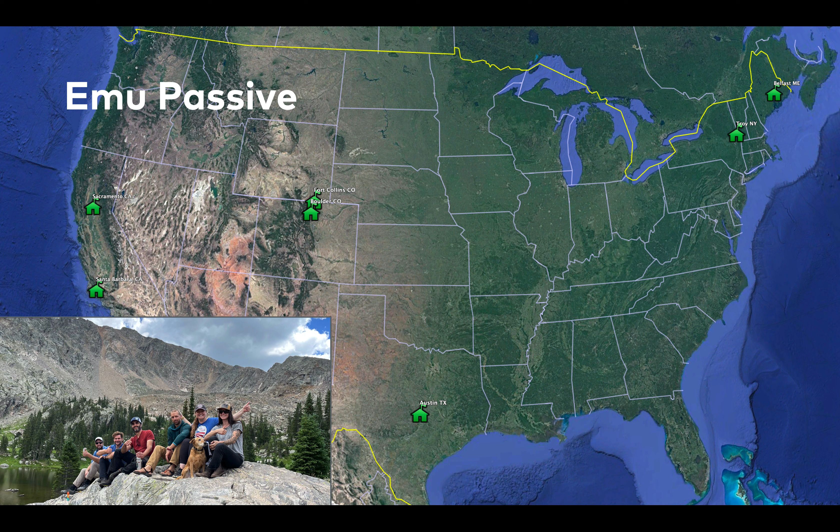Emu started as an architecture company about 15 years ago. We have working experience in Italy, Germany, Australia, and the US, which allows us access to research and information from other countries and climate zones, which we bake into the projects we do and the training we provide to builders.

Emu is the actual Australian bird. It's not an acronym, it's just a bird.

We started in Passive House in about 2010, and for at least 5 years now, we have 100% Passive House projects. We do not do code compliance, we do not do net zero, we do Passive House. We do Passive House very well, and we do training mostly, and we support builders in their first few projects, and that is the consulting that we do.

We are now the biggest training providers for Passive House builders in the country. This map shows the 1 week in-person hands-on workshops that we had just in 2022. We have a trailer that we take the workshop on the road, and we meet builders from across the country and teach them about Passive House.

We operate in a very niche market where hitting 0.3 ACH50 at the blower door test is normal instead of 3 ACH50 as code minimum. And this is a really big drive for us.

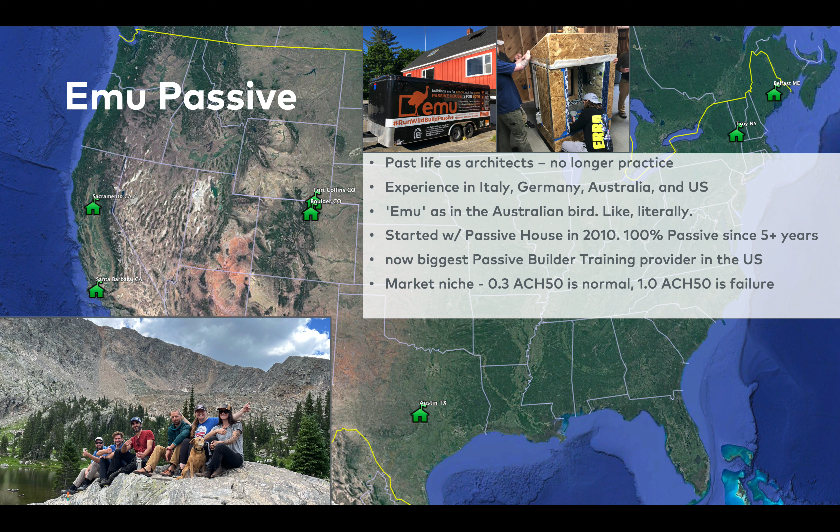Some of the presentation you're going to see today is informed by how normal it can be to hit that high level of performance. In our niche, hitting 1 ACH50 is kind of a failure, while it's still way below code minimum performance. We have Passive House consultants on staff.

I am the only certified PHPP expert in Colorado and many states around. And I'm also the only licensed certifier in Colorado for the Passive House Institute.

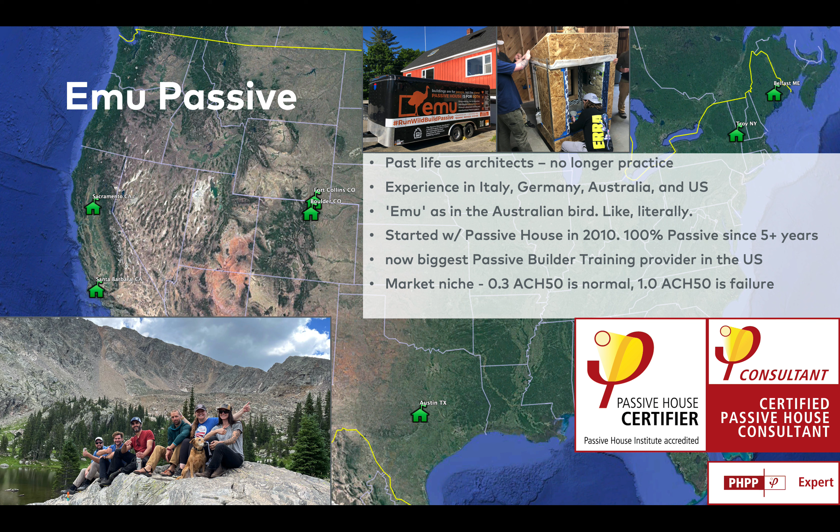Today, as I mentioned, we're going to go over the certification process, starting off with an overview of the Passive House standards that are operating in the market, looking at design stage, construction, verification, and certification.

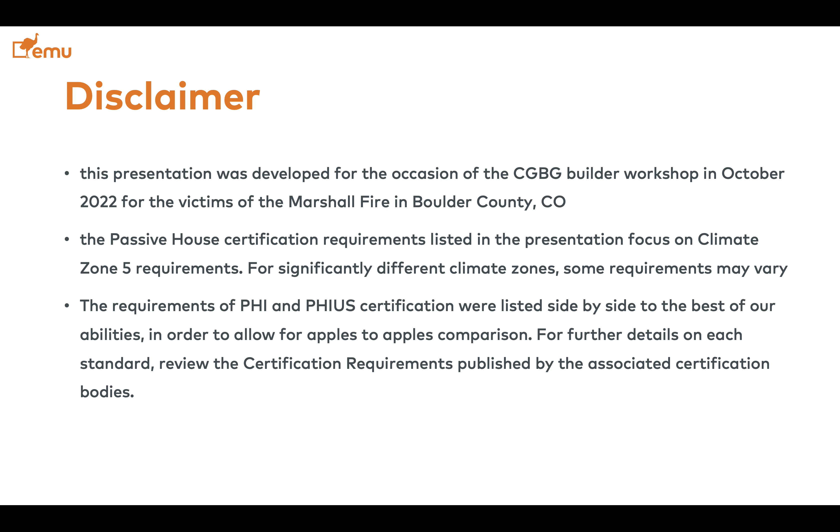We also try to compare the certification requirements of PHI and PHIUS to the best of our abilities. We are actually working on a white paper comparing the two, and we put together this presentation today trying to portray both standards as accurately as we could.

So talking about Passive House standards first, and really the Passive House concept first. We have a design of a building, floor plan, building section. This is actually a design for my personal house up in the mountains. And we are implementing 5 pillars of Passive House. First of all, super insulation.

The assemblies are much more insulated than code minimum. This sometimes comes as a surprise to an architect, who may think they can do Passive House in Climate Zone 5 with the same R20 6-inch walls as they do code minimum. That's not going to happen.

Then we want to avoid thermal bridging. We're going to see what that means in terms of requirements, but we want to avoid mold and condensation, something that code does not cover, but Passive House does. We want to have high quality windows and doors in order to meet thermal comfort. Again, this is something that code is decades away from implementing, and Passive House does very well, and PHI has the comfort requirement to address that.

We want to be very airtight, and we want to have a fresh air ventilation system through the ERV or HRV. Now, for single-family homes, the impact of thermal mass is highly negligible. If you Google what's a passive house, you'll find thermal mass mentioned there. The reality is that for residential projects, the impact of thermal mass is negligible.

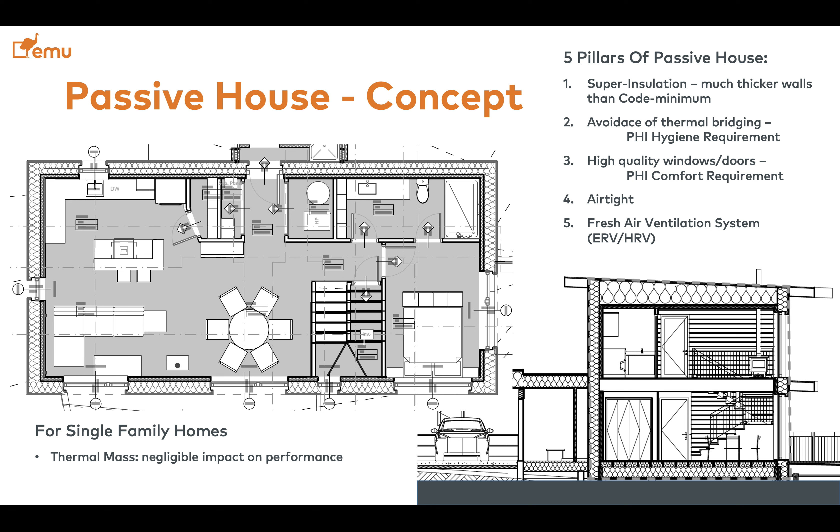We've done dozens of passive houses without thermal mass, and the comparison is that you cannot get to a passive house without insulation, but you can get to a passive house without thermal mass. So that is a big misconception in the market right there.

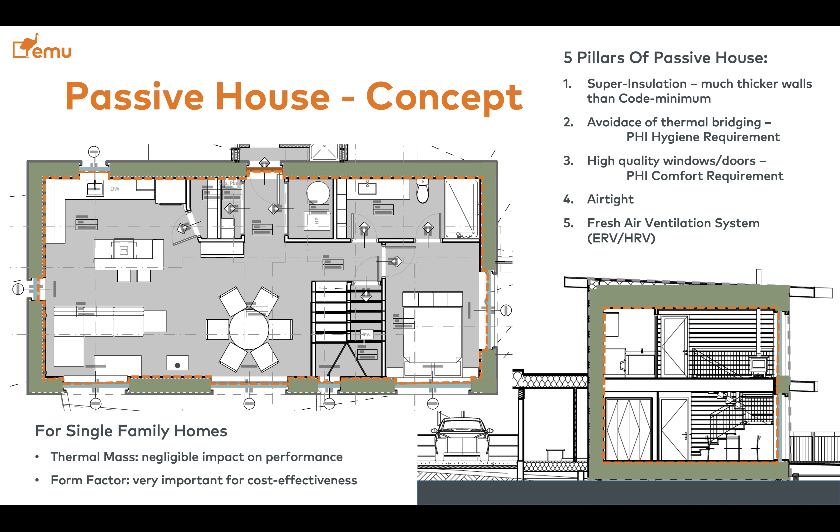The form factor we're going to see today is one of the very most important things to make a passive house project cost effective, and that is where architects are extremely crucial to this part of the process. So the green and orange here highlight the amount of insulation that we need in the walls of the building thermal envelope and the air barrier that runs on the interior of that.

We have two institutes that work independently and separately from one another: the International Passive House Institute on the left, PHI, and the Passive House Institute US, PHIUS. They used to work together until about 10 years ago. They no longer do that. It was a bad divorce, and we need to move on from that.

Now, for new builds, they offer different certification standards. PHI on the left offers what they call PHI Passive House. The Classic, Plus, and Premium classes are something we'll see later today. PHI also offers a lower entry-level certification standard that actually performs very similar to the PHIUS 2021 standard, called the Low-Energy building.

PHIUS offers a performance-based standard, the PHIUS 2021 Passive Building Standard, which I've shortened to PBS since Passive Building Standard is very long. The alternative is a prescriptive approach that PHIUS offers for single-family homes. PHI, the international standard, does not offer prescriptive approaches because in their experience that is very risky in terms of actually delivering the performance one expects from a passive house.

We do not address remodels in this presentation. Both institutes have standards specific to remodels of existing buildings, but because this presentation is put together mostly for the Marshall Fire victims, we're not going to address remodels right now.

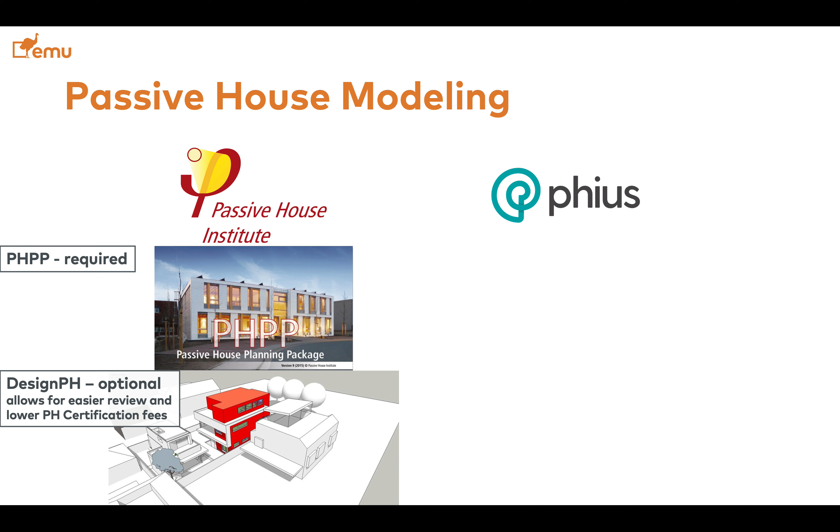PHI uses PHPP, the Passive House Planning Package, and they also have a 3D interface for SketchUp called DesignPH, which is optional but makes it a lot easier for architects or consultants to do the modeling in the first place. It also makes it a lot easier for third-party certifiers like ourselves to certify and verify what you did. We literally issue a different fee if you do or don't have the 3D modeling, because without a 3D model, it's a lot harder for us to verify what you did.

PHIUS uses WUFI Passive. WUFI stands for the German Wärme und Feuchte instationär, a software that initially started just for moisture management analysis of individual assemblies. After the divorce, the Fraunhofer Institute in Germany developed a software to do passive house modeling, which is WUFI Passive.

Both PHI's PHPP and WUFI Passive are based on the same ISO standard 13790, so it's the same core of modeling. Calculating the same building with one or the other, with the same parameters, I would expect the results to be very close to one another.

What differs is the certification goals that PHI and PHIUS set for their projects. But if you model the same identical building with the two different software programs, the results are supposed to come in very closely to one another.

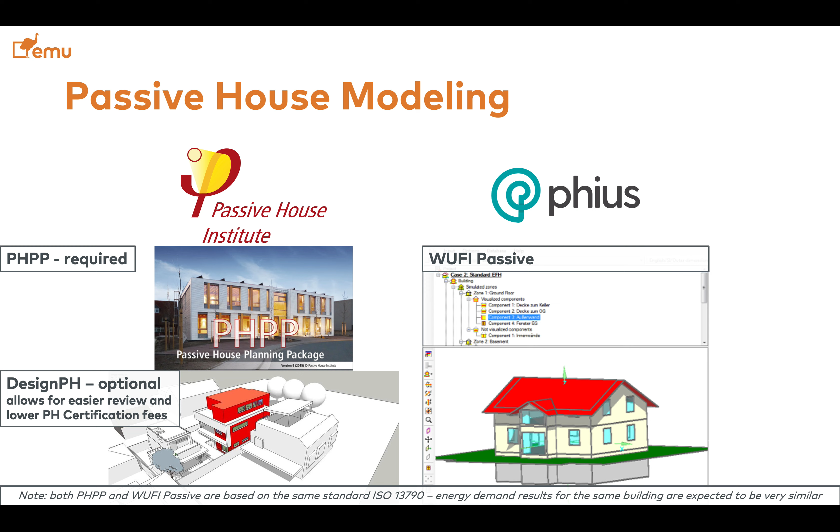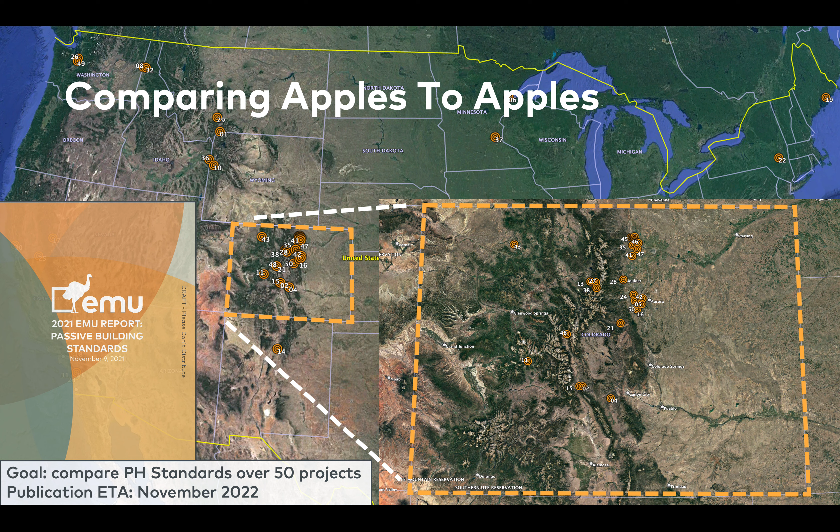This study is supposed to come out in November 2022. It was supposed to come out in November 2021, but life happens and things go along. Just in Colorado, we have dozens of projects, so we use this in this presentation a bit to compare the two standards.

In terms of overall efficiency, that is the reduction of heating and cooling compared to the 2018 code, PHIUS 2018 and PHIUS 2021 achieve about 60 to 63% reduction for the performance-based approach, reduction of site energy for heating and cooling compared to the 2018 code minimum compliance.

The PHIUS Prescriptive achieves about 50 to 55% reduction compared to the 2018 code baseline, whereas the low-energy building, as I mentioned earlier, performs—it's not called Passive House, but it performs better than PHIUS Passive House, just if you look at the actual numbers. This is based on about 50 projects that we have, and this study is going to be published soon.

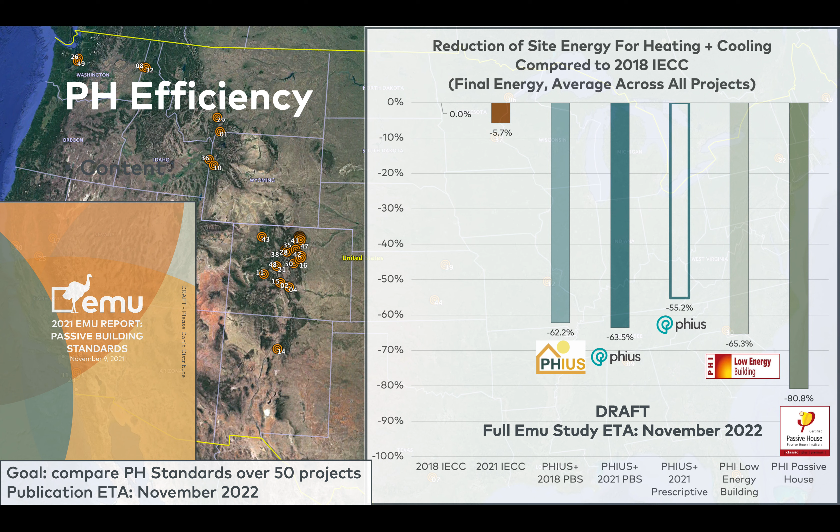PHI's Passive House, on the other hand, is the most performing in terms of reducing heating and cooling, with a reduction compared to the 2018 code of over 80% on average. So the certification requirements we looked at through the lens of the Marshall Fire, which is located in Climate Zone 5.

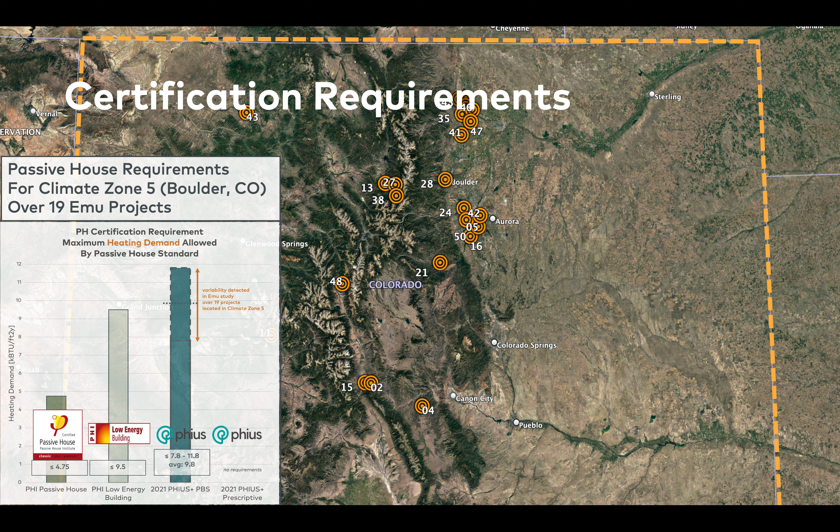We have 19 projects used for this analysis. In terms of heating demand, PHI Passive House is set at 4.75 kBtu per square foot a year maximum heating demand allowed. Low Energy Building has twice that, so 9.5 is the limit. PHIUS, as I said, has quite a bit of variability depending on size and complexity of the project. Over the 19 projects we saw, it ranged between 7.8 and 11.8, averaging 9.8 kBtu per square foot a year, so slightly less performing than the Low Energy Building.

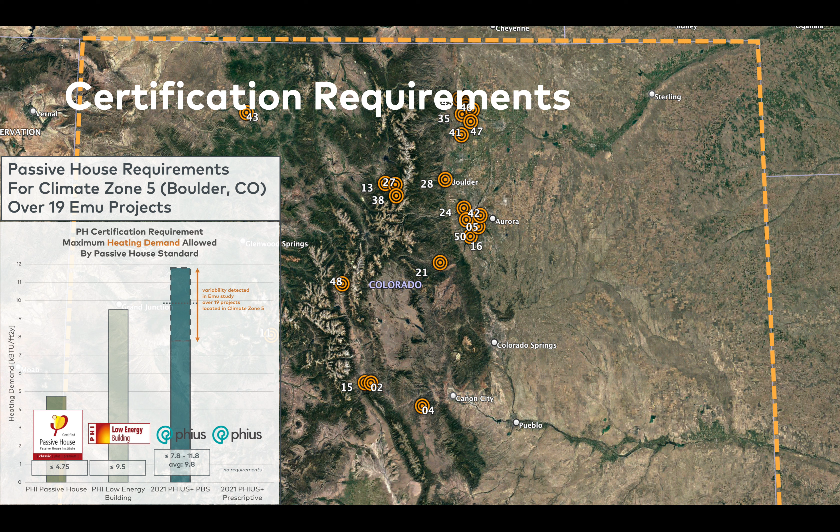In terms of cooling, PHI Passive House has 4.75 sensible cooling plus some allowance for dehumidification, which in Colorado, a dry climate, is 0. Low Energy Building has 9.5, and PHIUS, over the 19 projects we looked at, had a similar range—this may need updating because the variability is actually between 4.5 and 9.5. The numbers listed under the PHIUS logo, I apologize, are not up to date, but the graph is. The average for cooling is slightly less than 7 kBtu per square foot a year.

Something interesting is that the variability of PHIUS also changes depending on project size. PHIUS uses a surface-area-related parameter, the Q50, instead of the ACH50. For these projects, we converted those numbers to ACH50 so we can speak the same language.

PHI Passive House has a maximum allowed air leakage at the blower door test of 0.6. As I said earlier, once you get into this, doing 0.3 becomes normal, so 0.6 is not intimidating at all. Low Energy Building is less than 1 ACH50.

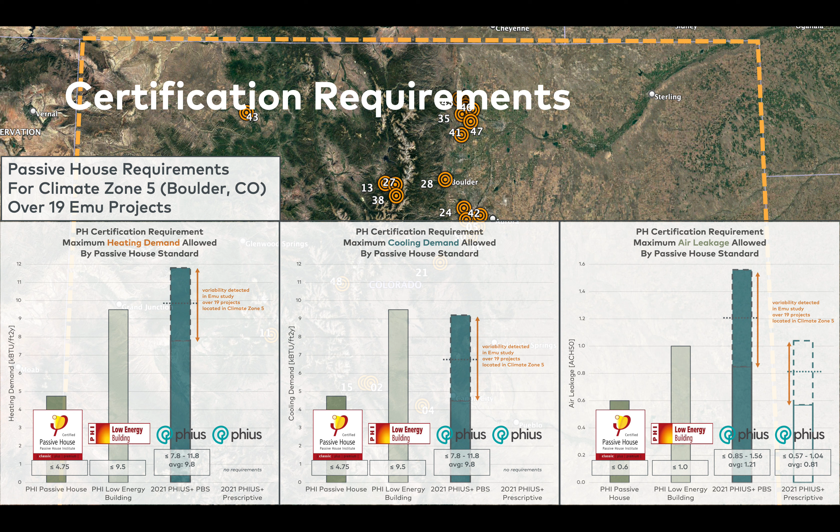For the study, PHIUS performance-based, shown in the blue column on the right-hand side, has a variability between 0.85 and 1.56, with an average of 1.2—so higher air leakage for PHIUS performance-based compared to the Low Energy Building. Interestingly, the prescriptive standard for PHIUS requires the building to be tighter, with an average listed here between 0.57 and 1 ACH50, at an average of 0.81. So in terms of air leakage, it's tighter than the regular PHIUS.

Core requisites. If you look at the details for PHIUS certification, there are some core requisites.

You need to certify the building not just with PHIUS, but you're also required to follow the EPA Energy Star Certified Homes program, the EPA Indoor airPLUS program, as well as the DOE Zero Energy Ready Home program. Whereas PHI doesn't do that—it's just PHI, either PHI Passive House or PHI Low-Energy Building.

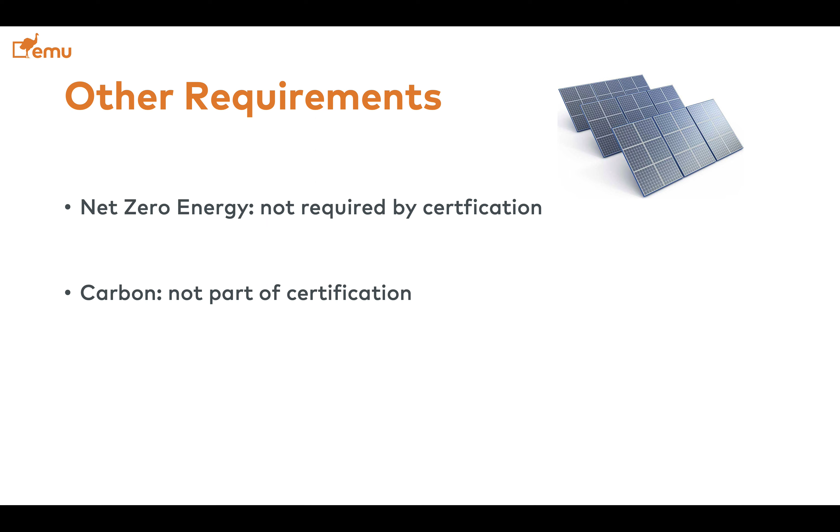Other requirements you may be wondering about: net zero energy is not required for certification—you can get there, but it's not required. Carbon is not part of Passive House certification; you may use low embodied carbon materials, or you may not—that's up to you. It's great if you do, but it's not part of Passive House certification. Going all-electric, heat pumps, whatever—that's also not part of certification, nor is any prohibition about specific materials.

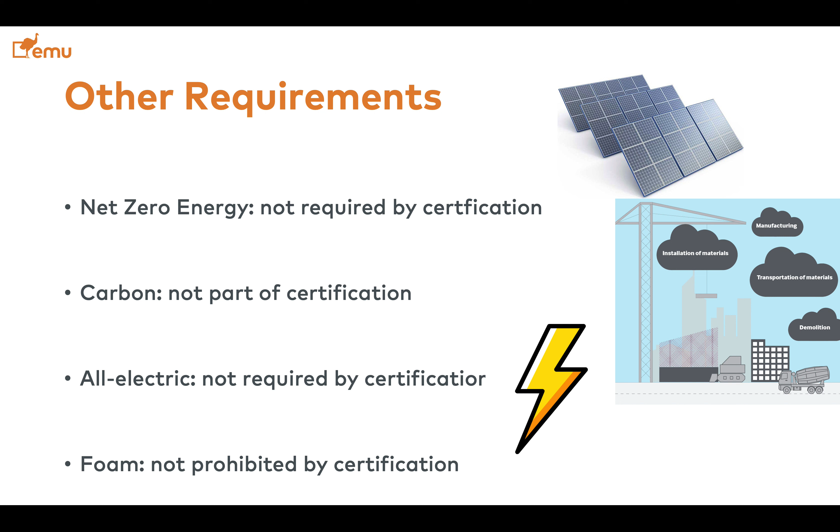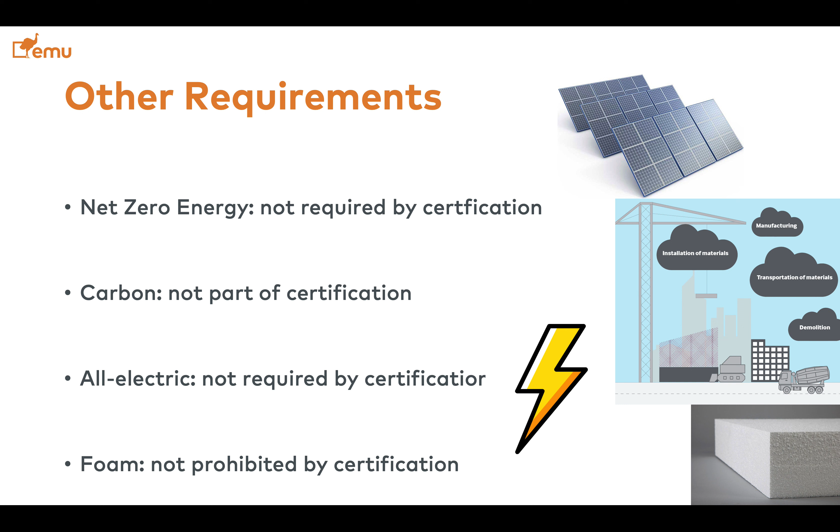There is a myth that you cannot use foam in Passive House. You can, and it's up to you to do that. With regards to spray foam, for example, you want realistic performance data, which are much lower compared to the label value of spray foam products, but there is no prohibition in terms of foam in Passive House projects.

A quick overview of the parties involved at different stages of a Passive House project. For Passive House, you have a Passive House consultant, who may or may not be certified, but is the person in charge of all the passive-related things on the team, including the energy modeling. In fact, the Passive House consultant also collects some of the construction documentation.

We're going to see what it is. The testing, especially for the blower door test, can be done by any blower door test technician out there, as long as they have the equipment and follow the ISO standard we're going to cover later. But PHI does not require the blower door test technician to undergo any specific type of training, other than being trained in doing blower door tests. There's no PHI certified blower door test guy sticker.

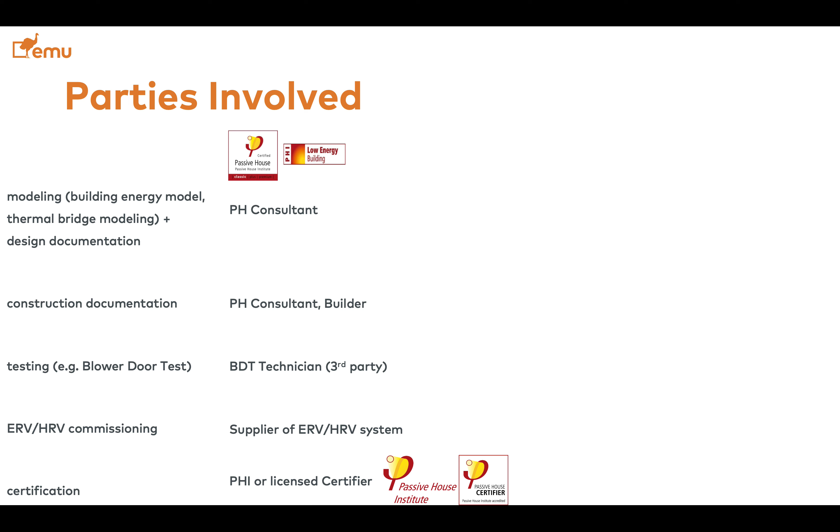The ERV, HRV fresh air system we're going to see later in this presentation, they need to be commissioned, and they are typically commissioned by the supplier or the installer of the system per the specs we're going to see later. Certification itself for PHI can be done either by PHI itself or by a licensed certifier on behalf of PHI, like myself.

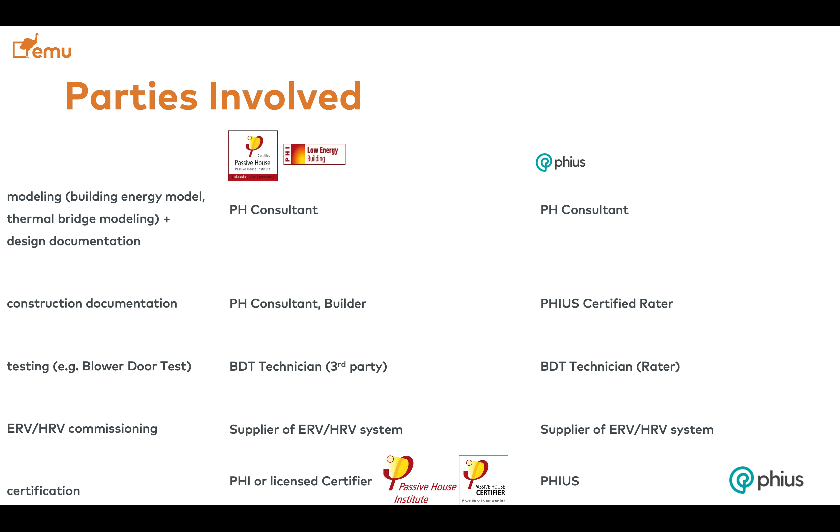For PHIUS, you have a Passive House consultant. You have a separate PHIUS rater that you have to hire to collect information during construction. The blower door test technician, I'm unclear if there can be anyone or it has to be certified by PHIUS. Similar consideration for the commissioning as for PHI, and certification is done by PHIUS directly.

Now let's look at the design stage. We talked about a little bit of the infrastructure for certification. Let's look at things that need to be addressed and taken care of during design.

So this is a big responsibility for architects to tune down the non-artistic creativity here and actually be responsible for the designs that they're doing. The more complex the shape of a building thermal envelope, the harder it is to make Passive House. A complex architectural design may make it impossible for a building to meet Passive House. Passive House is not something that you throw money at and get it. It needs to be efficient. You can throw a lot of money at the problem and try, but if your design sucks because it's very complex, you're out of luck.

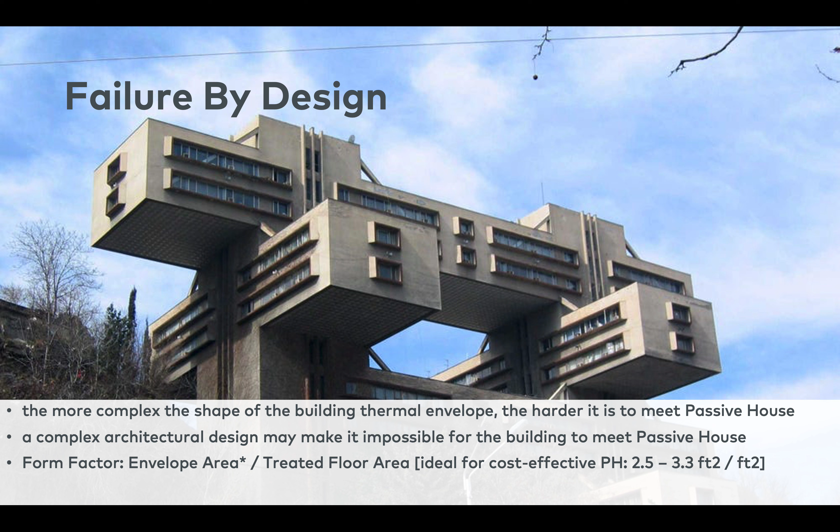You're not going to get there. This is not a checklist. The form factor is what defines the complexity of a project, and that is the area of all the exterior envelope assemblies: the area of the exterior walls, the area of the ceiling if your thermal boundary is at the ceiling, or the area of your roof if your thermal boundary is at the roof, the area of your floor or slab depending on where your thermal boundary is at the bottom. All of that area of the envelope divided by the treated net floor area, net of the interior walls and exterior walls as well. That number, the form factor for a single family home, we want to see in the range of 2.5 to 3.3. If you're in that range, it's going to be fairly easy and cost effective to get to Passive House. If you are much higher than that, it's going to be much more expensive and possibly impossible to get to Passive House.

So let's look at the Passive House designer and consultant. The consultant is the person in charge of Passive House on the design team. Specifically, they're in charge of developing and updating the energy model, whether it is PHPP or WUFI Passive. They may also be in charge of covering other scope, such as thermal bridge modeling. Sometimes we do the thermal bridge modeling for other consultants on other projects where we are not the consultant, we just do the specific thermal bridge modeling task.

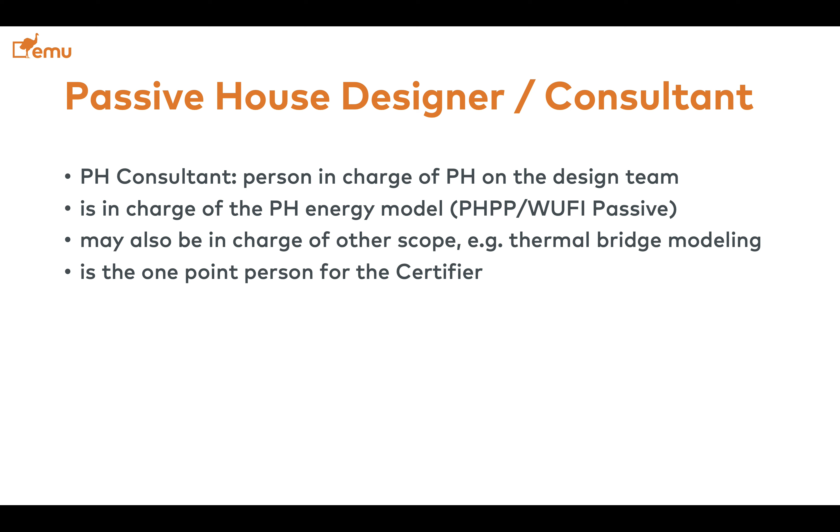So the consultant is mostly and primarily in charge of the Passive House energy model, as well as interfacing with the certifier. In fact, the Passive House consultant is the one point person between the certifier and the team. We had teams where we started receiving information from the builder, from the homeowner, and that does not work. We need to have one single point person throughout the process in charge of Passive House on the team, and that is the Passive House consultant or designer.

We talk about consultant or designer because in the international accreditation for the consultant, you have in Europe, or internationally—Australia, China, everywhere else than the US—PHI offers professional accreditation for people that do the modeling, and they can be certified as designers or consultants.

The only difference between designer and consultant is that in Europe you cannot call yourself a designer unless you are a registered architect. So I, Enrico, am also a certified Passive House designer because I'm a registered architect back home in Italy.

Whereas if anyone that is not an architect, back home or internationally, passes the exam—it's the same course, same exam, identical path—you become a designer or a consultant depending on your previous professional accreditation, that is, whether or not you are a registered architect. For PHIUS, there's only the certified consultant, which applies to both.

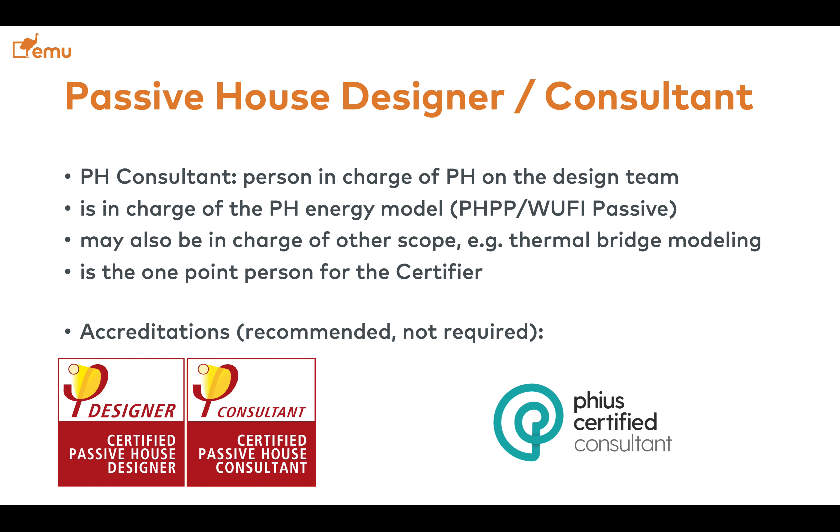There's some confusion in the market about consultant for PHIUS, that is a registered trademark, but the Passive House consultant term has been used internationally for decades, so that trademark kind of does not matter.

Design, we talked about the form factor, and for cost effectiveness, the first priority is keep it simple. Keep the building envelope simple. If you do that, it's going to be a lot easier to air seal, to insulate, to get the right sequencing down. It's going to be a lot cheaper.

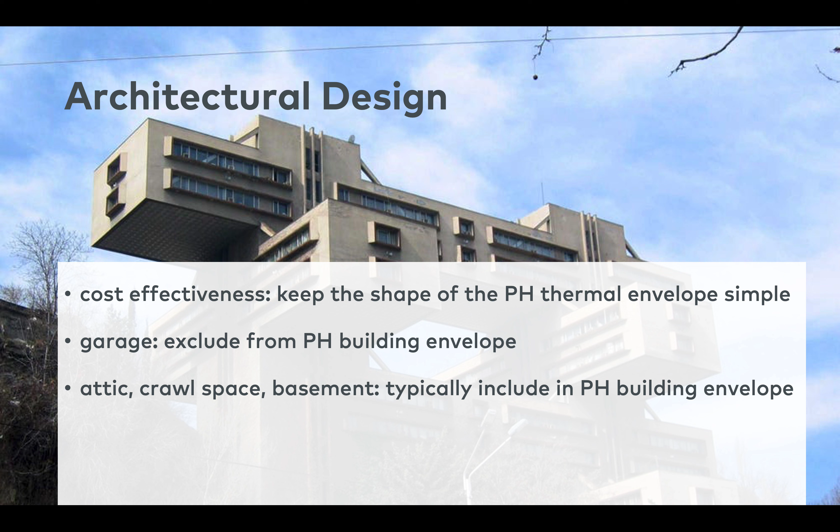For example, garage excludes from the Passive House building envelope—that's a friend's advice I give you. We have tried in the past to include the garage in the Passive House envelope. Do not do that. Attic, crawl spaces, basement—typically include them in the Passive House building envelope, especially because they make your form factor look better.

So the more glass you have, the more expensive it's going to be. It's as simple as that. Plus, there are ways to increase the amount of energy coming through the glass by just adjusting the coating on the glass. So you don't need the entire south wall to be glass. You don't need to live in a fishbowl. That's the feedback the energy model provides you with.

Do expect much thicker walls than code minimum if you expect to do Passive House in Climate Zone 5. With a 6-inch R20 wall, you are off with a wrong start. So expect at least twice that thickness and R-value.

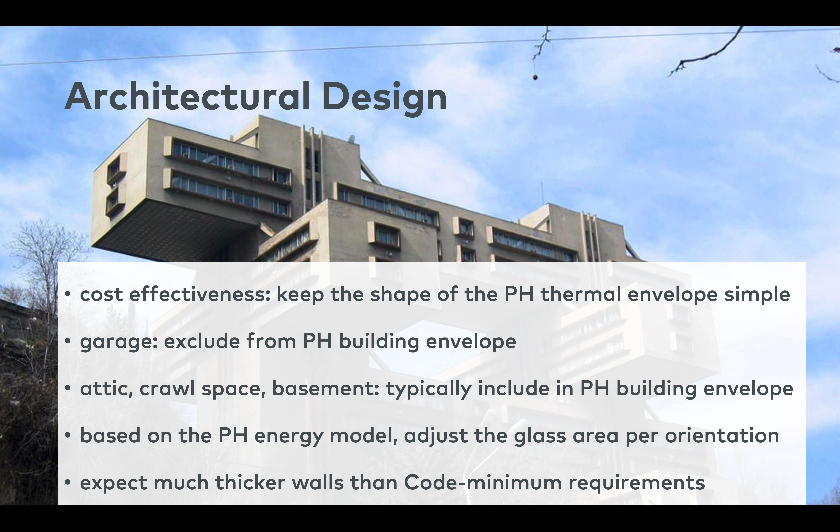Typical causes of thermal bridging—this is something we just put a list together. We need to talk more about that, but that's why we do training. Avoid metal beams and posts in insulation at exterior walls, exterior floor, exterior ceiling, or penetrating through the envelope from the inside to the outside.

Concrete, especially slab or walls, penetrating the envelope—that is a thermal bridge. Metal flashing through the insulation: metal flashing, in my experience, is the most unaddressed and most detrimental source of thermal bridging in the country today.

Nobody talks about that, but if you have a piece of flashing going through your insulation, that's a thermal bridge. That cuts your insulation value down. It cuts down the performance of your building, and it may cause more than condensation. So if you do want to have flashing going through your exterior insulation, there are other products such as self-adhered flashing or vinyl flashing. Do not use metal, period.

Metal sill pan penetrating under windows, that is very popular for some builders—that's a huge no, period. Uninsulated window and door install gaps: installation gaps between the window and the rough opening need to be insulated on all four sides, period.

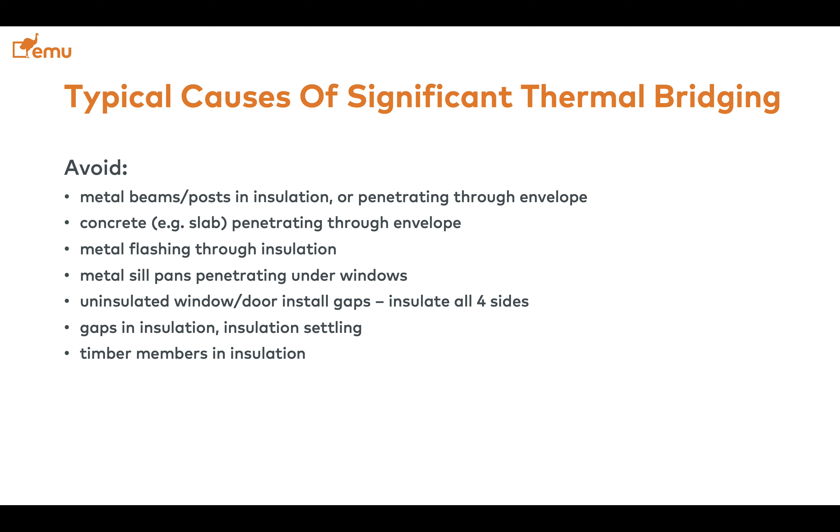Let's move on. Gaps in insulation settling all lead to underperformance of the building. And timber members in insulation, such as your studs, do cause thermal bridging, but compared to metal flashing or steel posts, they are mice compared to elephants. So there's a lot of effort out there to try to mitigate mice, while elephants are left to roam free and damage your building. Be aware of what you're doing. You really want to know what is important to address and what is not, because that drives the cost up and down. If you want to be cost effective, you really want to know what's a mouse and what's an elephant.

Some of this cannot be avoided, and the first thing we want to avoid is condensation. So the consultant on the project needs to do the modeling, the thermal bridge modeling.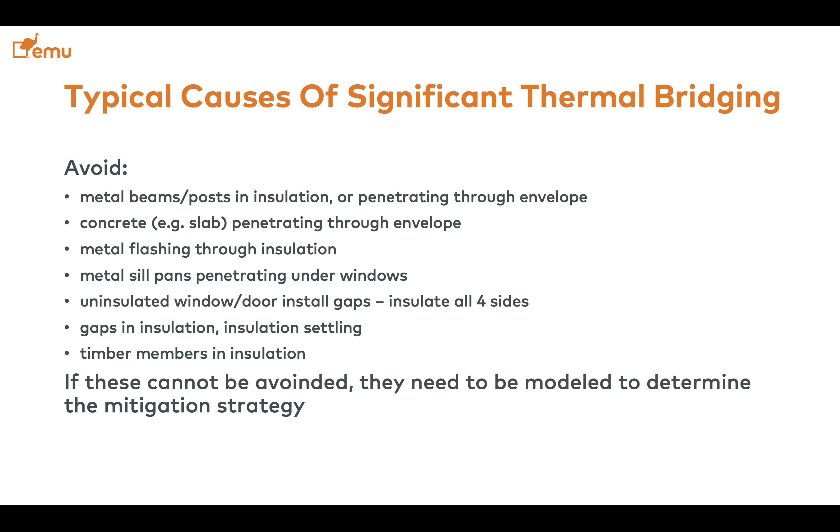To assess whether a thermal bridge is a problem in terms of mold, condensation and performance gap or not. Thermal bridge modeling is a typical condition that needs to be modeled for passive house, including transition junction details, say from a wall to a ceiling or from a slab to a wall. Those are typical transition junction details. Structural elements such as, hey, I have a steel post in my wall, do I need to model it?

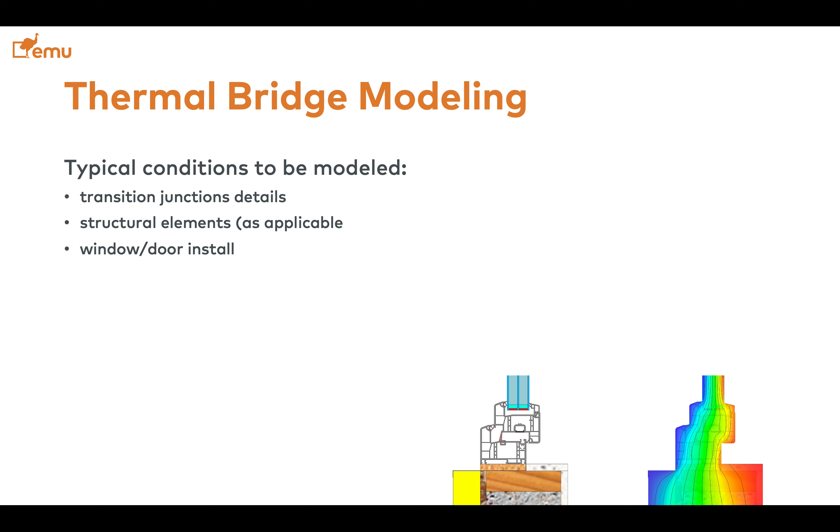Yes. Let's move on. Window and door install details, because there's a lot of good and bad that we can do in designing installation details for windows and doors. This is not looking at the quality of the install, it looks at the quality of how that install detail is designed. So this is really looking at the installation drawing and modeling that, and seeing if there's any issue in terms of thermal bridging and mold condensation.

Suitable software out there: we have Therm, which is free and it sucks, but if you're the passive house consultant just for a one-off project, you can go with that. Flixo is another one. We use Mold Simulator, but it costs like $5,000, so there's a cost to that. Any other finite element software out there can be used as long as it complies with ISO standard 10211.

There are other types of thermal bridge software modeling options out there that, instead of using finite element software, use finite differences and finite volumes. They are not suitable for passive house, they are not accurate enough. For example, ArchiCAD has a module for thermal bridge software built in that is trash. Do not use that. You need an actual finite element software.

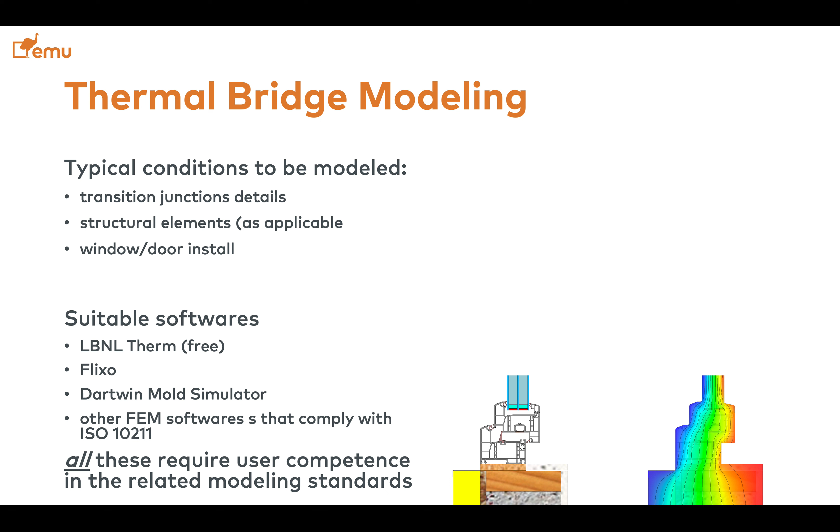All of these require the user to be competent in using them. This is a list of the ISO standards that you need to comply with, if you decide to do the thermal bridge modeling yourself.

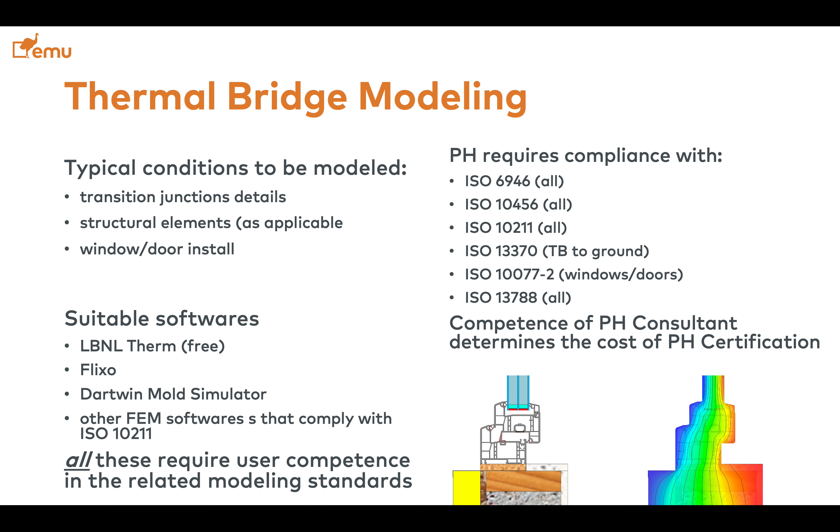Our certification fees vary depending on the quality that we see in this kind of modeling. If you're a first time trying, your fees are going to be higher, period. That's just the complexity of the process on the modeling side. On the construction side, it's a lot simpler in my opinion.

Dynamic moisture modeling is something that's at the discretion of the certifier. So if we receive an assembly that we believe is going to have a moisture problem, we may require extra documentation from the team to prove that that assembly is not going to have moisture problems.

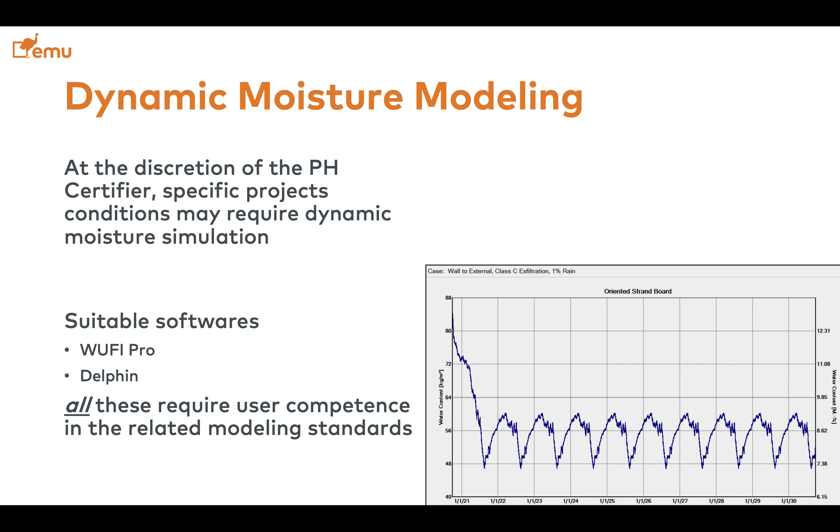There's a couple of softwares out there, same as for the thermal bridge modeling software. This requires knowledge in building science. If you want to undergo this route, you want to be prepared for this. And we want the modeling to be done according to ASHRAE standard 160.

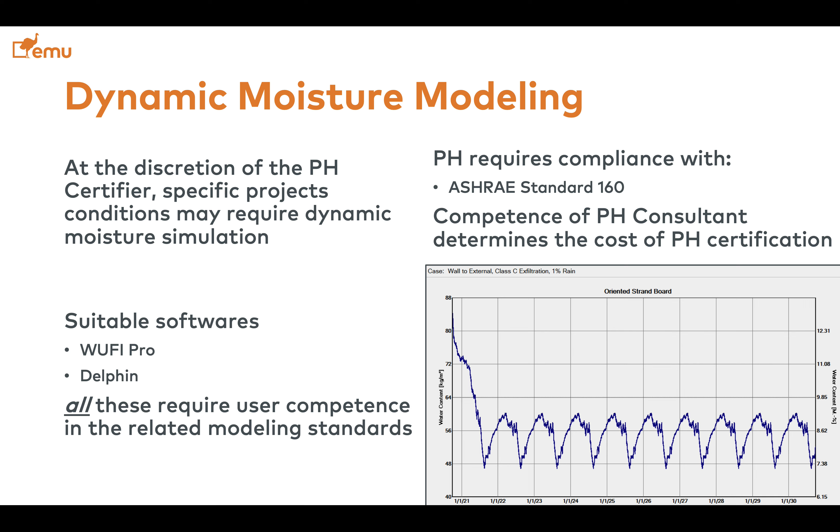Now, there are certified wall systems out there that do make life easier, because somebody has already done this. The thing that is often misunderstood is that while the wall system itself is certified, that does not translate to the building where you apply that wall system automatically being certified.

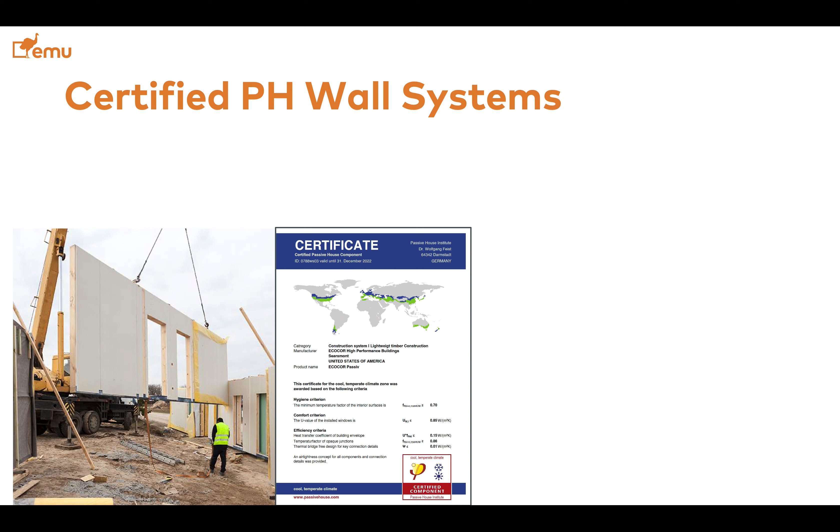Think about certifying a design building with Legos. If your individual pieces of the Lego are certified, it does not mean at all that your building is going to be certified. You still need to do the full passive house model.

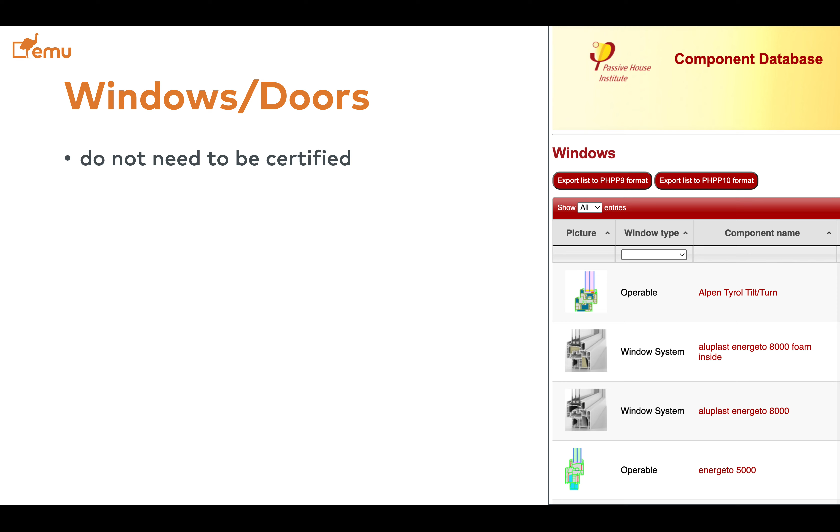Windows and doors, there's a database for that. Windows and doors do not need to be certified. Certification helps—certification of a component, wall system, windows, really helps in the process of certification, but it may be more expensive. So the windows and any component do not need to be certified, but they do need to meet the criteria and requirements for passive house.

So you as a consultant, you as a builder—the consultant is going to do this, so you need to depend on the consultant. As a consultant, if you choose to go for the non-certified route, then you need to verify the comfort criterion and the hygiene criterion via modeling, and that takes competence to do that.

For Climate Zone 5, do expect needing at least a passive house C-grade frame, probably better than that. So probably more like a B, but that depends also on the design of your building.

So if you have a very compact building, you can get away with a C grade, and if you have a more complex building, you may need a B grade or an A grade. For C grade and A grade, we have training material to show what that is.

Triple pane windows, Climate Zone 5 — you will not certify passive house with a double pane window because of comfort, not energy. So it's triple pane, and you want thick glass units, 1.5 to 1.8 overall glass thickness, filled with argon or krypton gas fill, low-E coating, warm edge spacers, and so on. There's a lot of detail that goes into windows. The solar heat gain coefficient — low gain, medium gain, high gain — in Climate Zone 5 is typically going to be high gain, but that's really driven by the building energy model.

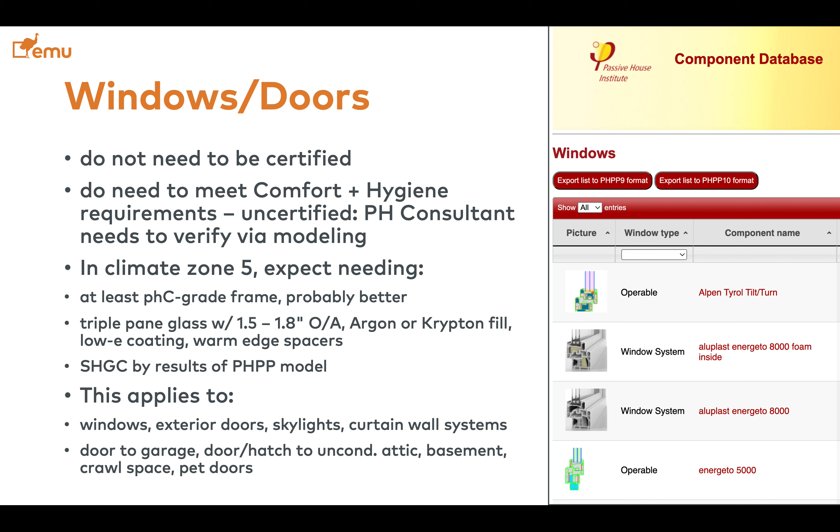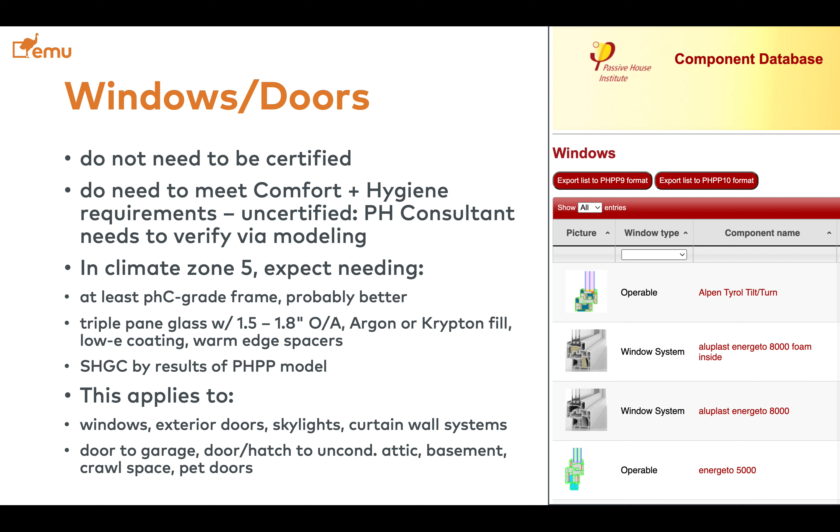This applies to all windows, exterior doors, skylights, curtain wall systems, as well as the door to the garage. The garage is unconditioned, so the door to the garage, typically just an interior door, is for passive house the boundary of the building envelope. We want that to be insulated and airtight, as well as any door or hatch to an unconditioned attic, basement, crawl space, or pet doors — they're all part of the passive house boundary, so they all need to be airtight and sealed. This is something that gets away from what you've been doing for 30 years — try to think about what your building envelope boundary is.

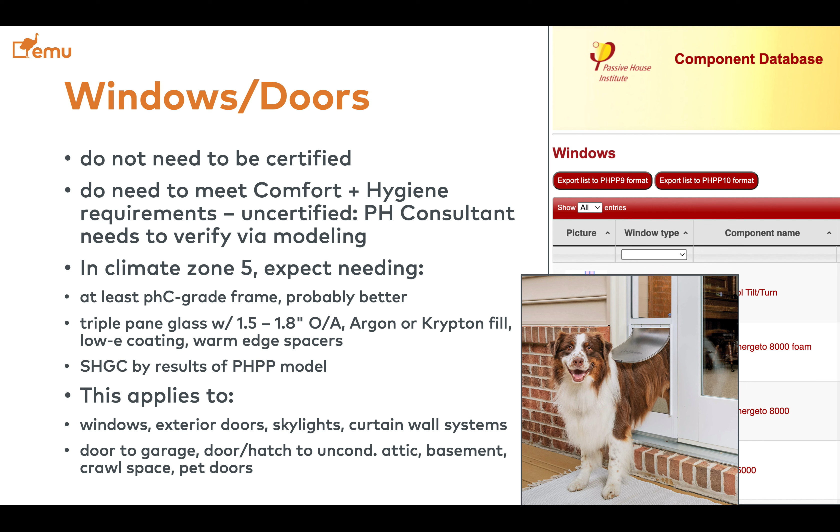A pet door — I'm using this example because literally we had projects trying to go passive house that wanted to use this kind of pet door. That does not fly, period. Passive house is a better product; we don't do that using the same products.

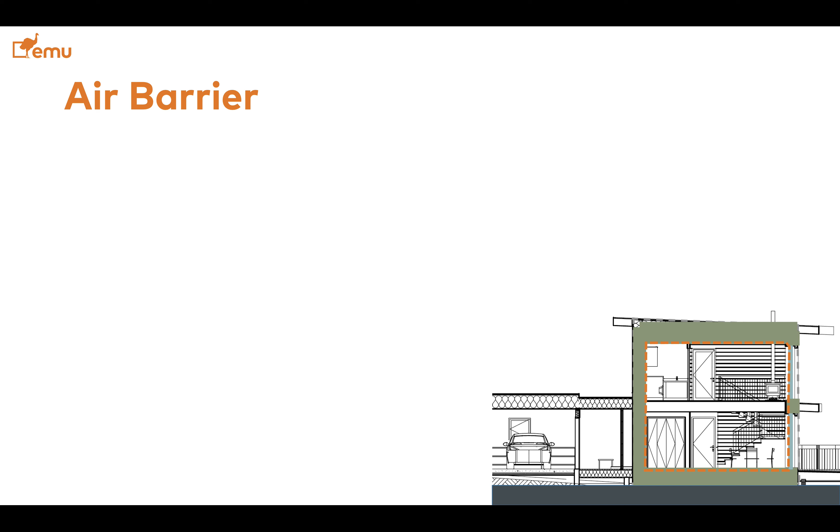Now, the air barrier is something important, and it scares a lot of builders, but once you get your head around it, it's actually pretty straightforward. We want one single, continuous, uninterrupted air barrier on the warm side of the insulation, on the inside. In the section on the right, the air barrier line is the dashed line on the interior of the insulation, shown in green. That doesn't mean it's the drywall — drywall is not an air barrier. It doesn't need to be right at the drywall; it can be a bit further into the assembly, but it needs to be on the interior of the bulk of the insulation. But we need one.

There are companies out there that promote a primary air barrier, a secondary air barrier, a third air barrier, and that is all bullshit. You want one single bucket. If you want to hold water, you want one single bucket that doesn't have holes or cracks — that's your one single seal. Same goes for the air barrier: you want one single, continuous, uninterrupted air barrier. Think about water — one bucket without holes will hold water; one bucket with holes will not. If you add a second bucket with holes to a bucket that already has holes, two buckets with holes will still not hold water. So forget about primary and secondary air barriers — that's bullshit. You want one single air barrier, continuous and uninterrupted, all around your building envelope — you're creating a balloon. Once you get your head around this, it's very easy to do.

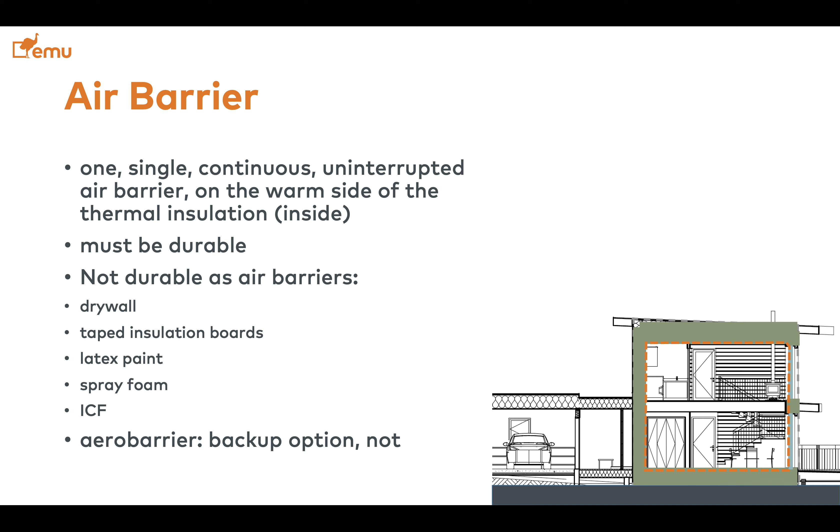ICF is not a continuous air barrier. We have data showing ICF can get your building to 2 ACH50, even 1 ACH50, but consistently without an additional air barrier applied to the ICF itself, it cannot deliver the passive house airtightness requirements. Aero barrier, we have good experience with, but we recommend that be just a backup, not the primary strategy for the air barrier of the building.

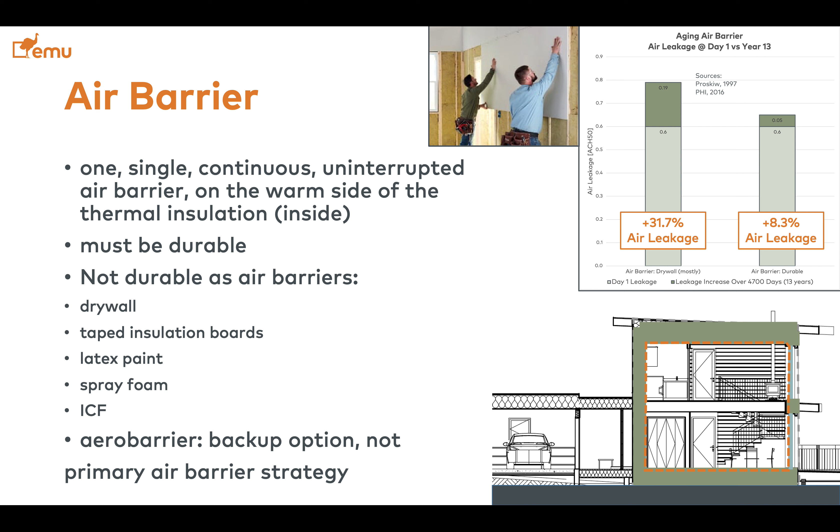Similarly, spray foam is not an air barrier, and taped rigid insulation is also not an air barrier.

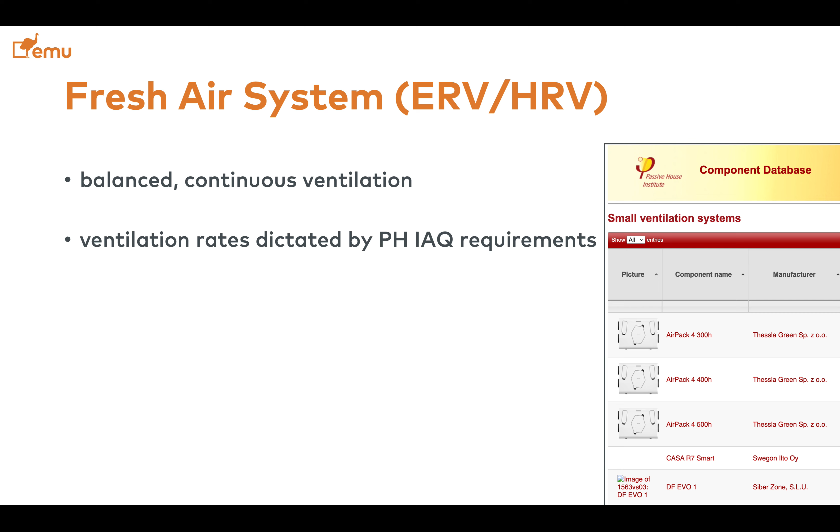Fresh air ventilation is required to be balanced and continuous in passive house. The ventilation rates are dictated by passive house indoor air quality requirements, not by heating and cooling requirements. This is a system completely separate and different from a forced air system. This slide calls for a fresh air system—it does not read forced air system. These are completely different things, and there are more details to this, but think of something completely different from a ducted forced air system.

There's a database for certified ERV and HRV units. In Climate Zone 5, you want an ERV that recovers moisture—I'll say that again, you want an ERV in Colorado Climate Zone 5. Some units not certified with Passive House have active heat pump heat recovery, such as CERV and MinotAir, and these are significantly less efficient, if you look at the actual numbers, than passive heat recovery units, the more regular ERVs and HRVs out there.

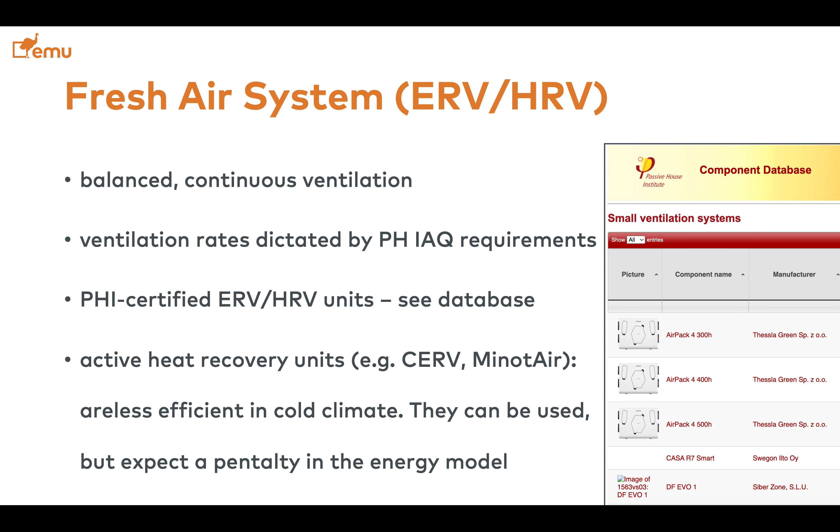Active heat recovery units may be used in certified passive house buildings, but you will see the penalty you pay in the energy model. So you can use a MinotAir or CERV in a certified passive house building, but you're going to suffer—you'll need to insulate more because that ERV or HRV is less efficient. Your walls are going to be thicker, and you're going to have more insulation in the attic and so on.

Units that are not certified—for example, there are a lot of units rated with the Home Ventilating Institute, the HVI, but not certified with Passive House. You can use these as long as the sensible heat recovery, not the total heat recovery, is greater than 87%, as well as consumption less than 0.757 watts per CFM, and they can install a MERV 13 filter on the intake and a MERV 8 on the exhaust. If that non-certified unit meets these requirements, you can use it in a certified passive house project.

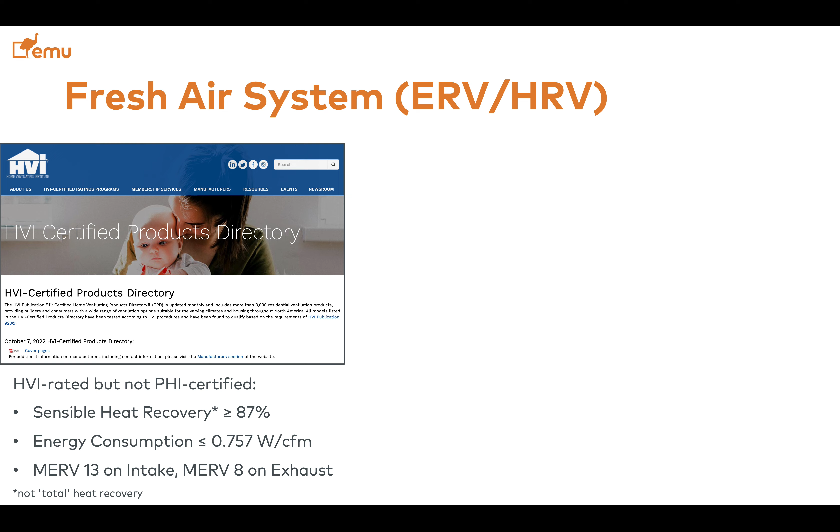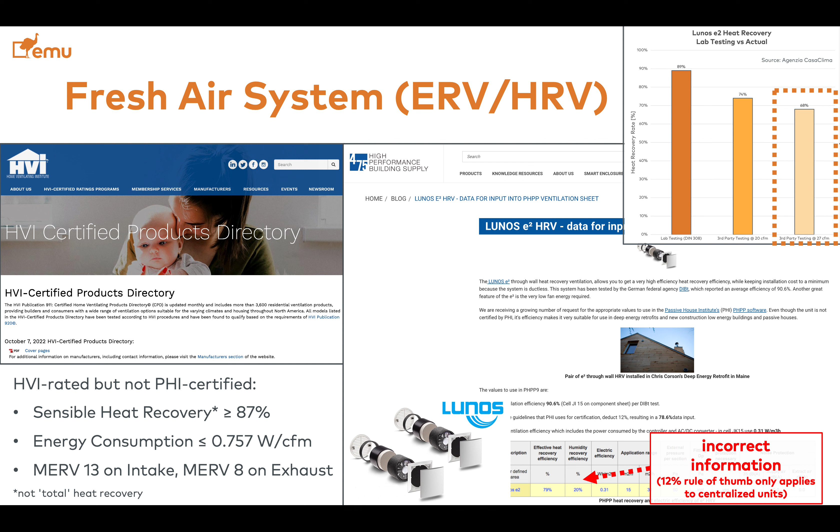This graph shows 68%, but it's not efficient enough for a passive house project in Climate Zone 5. So do not use Lunos in Climate Zone 5 if you are trying to certify the building with passive house.

Renewables, PVs and so on—passive house is all about conservation before compensation, and passive house does not allow energy trade-offs. The building must be efficient. So in Climate Zone 5, you cannot have an R20 wall with a very inefficient building, add a ton of PVs, and certify that as a passive house.

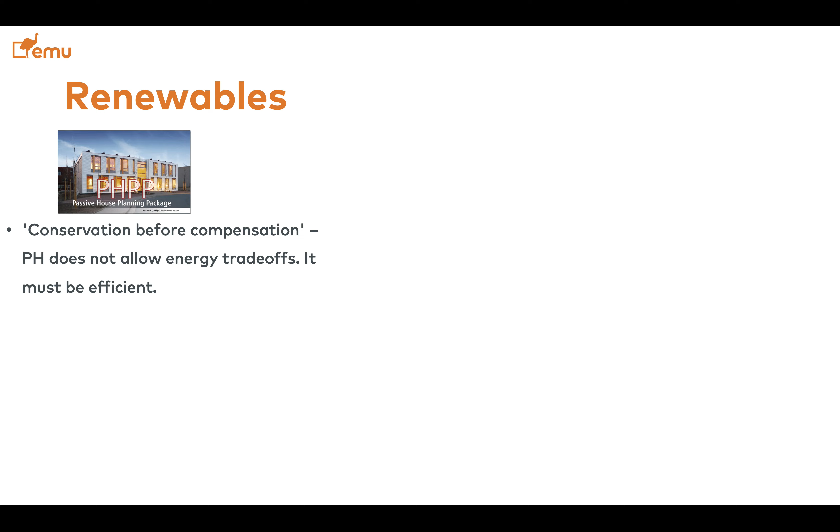You cannot do that because your envelope sucks for Climate Zone 5. So there is no compensation in passive house. Renewables such as PVs only impact the class of passive house. You can certify passive house classic with zero renewables. So if it doesn't fit in your budget to have PVs right now, you can add them in the future, but right now you can certify your building as passive house.

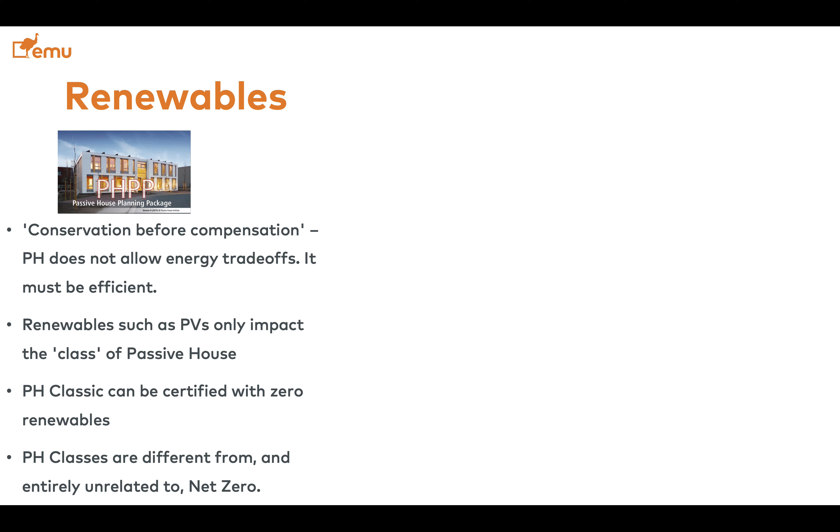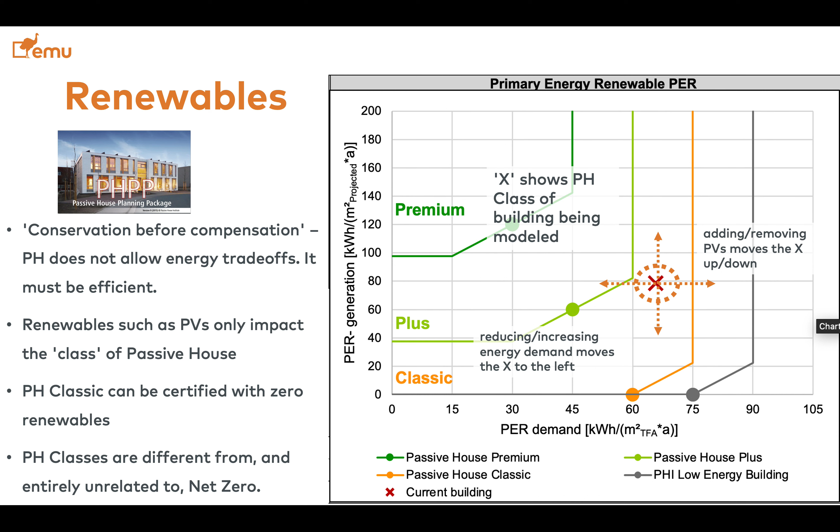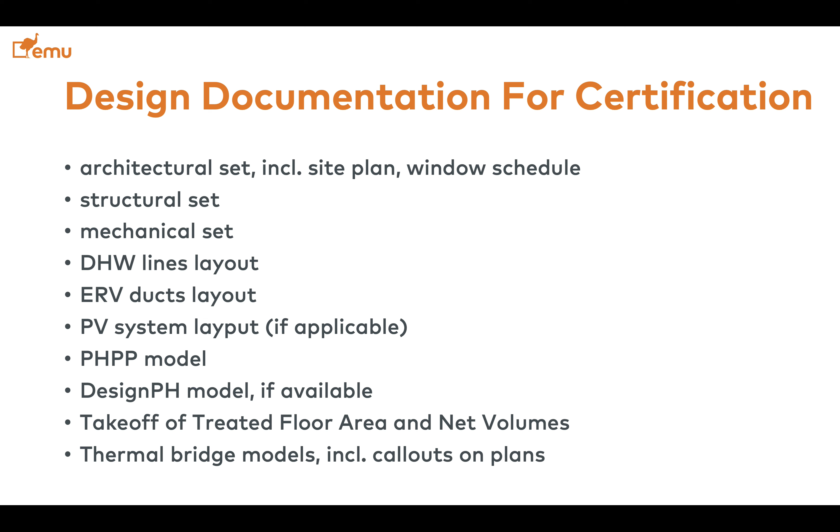Design documentation is a list of documents that you need to submit to the certifier throughout the process, and at the end, to verify that your building meets certification. We recommend starting that process early in the project stages, because once your building goes through permit or pricing, it's very hard to go back and make significant changes if you're far from meeting passive house.

So we do a first review of the project, and this is when we, Emu, are the certifier and not the consultant. It's a 2-hour flat fee review, $500. We do this ideally before permit application, because, hey, you need 20% more windows - if you do that after permit, you will need to resubmit. So this is something that may be impactful on your design, and you may want to do that before you apply for permit.

The goal is to assess the likelihood of meeting passive house certification in the first place, review the accuracy of the modeling, and based on that, we, Emu, can give you a fee for the entire certification process. If you email us your drawing plan and ask for an estimate for the certification process, you'll receive an email saying we do this flat fee 2-hour review, $500, and after we do that, we give you the actual quote.

Because if the consultant on your project has done a ton of passive house work, they know what they're doing, the certification fee is going to be lower. If they are a first timer and need to go back and forth a lot with us, the certification fee is going to be higher. This first pass allows us to determine just that. This is not a pre-certification - there is no such thing as a pre-certification with PHI, period.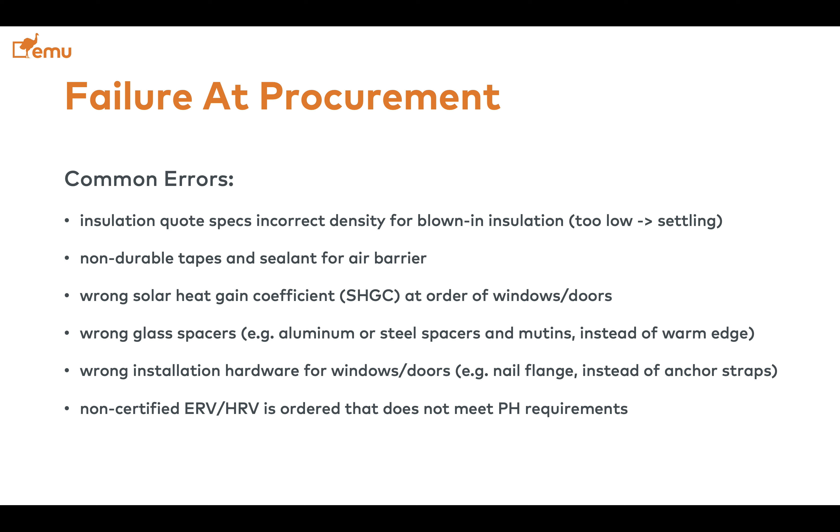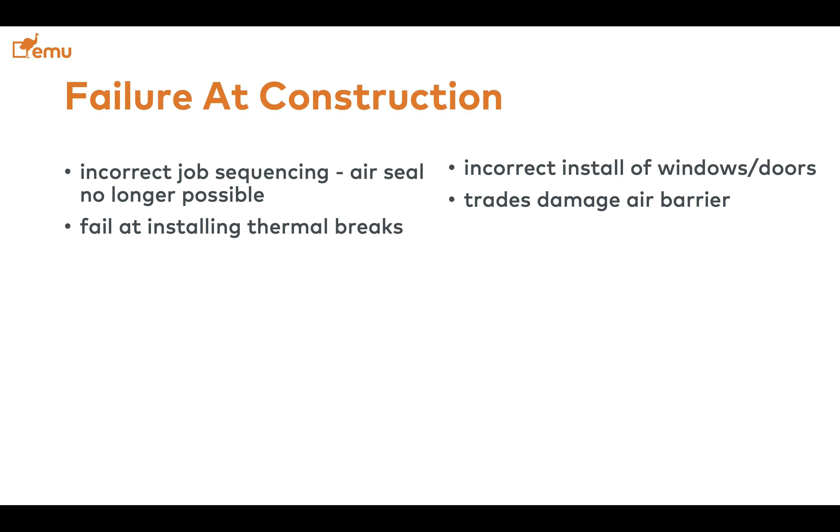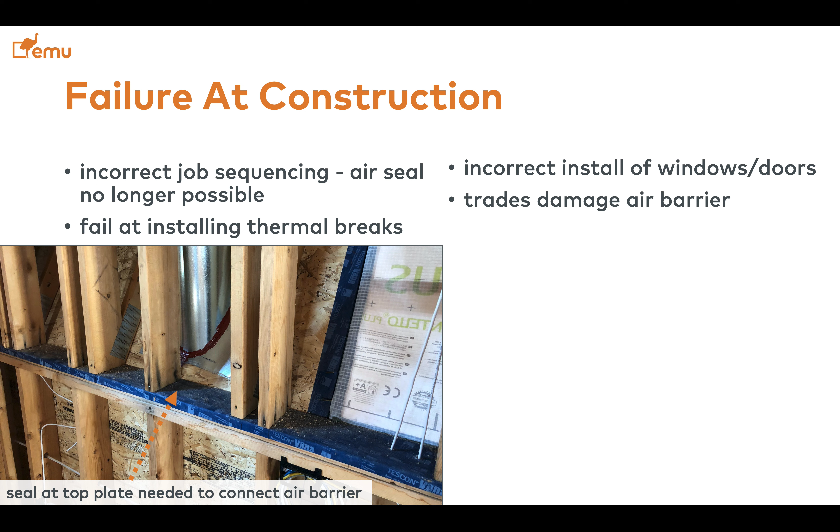At the construction level, you may have job sequencing that's critical for air sealing, or thermal breaks critical to avoid thermal bridging. For example, you're looking at a framing photo — the blue stuff is an air sealant tape over a top plate, and you need to install that before you frame the wall on top of it. If you don't, the air leakage from a much poorer quality air sealing job may cause your building not to meet Passive House air sealing requirements.

This other photo shows thermal breaks we need between an interior concrete wall and a concrete wall of a planter outside — those two concrete walls cannot meet each other. You see the white insulation at the foundation, which gets paired at the top with exterior continuous insulation on the outside of that plywood sheeting. If that concrete wall were to go through without those thermal breaks, we'd have a significant thermal bridge. So this is something you need to tell your crew or builder to do at the right time and in the right fashion.

Other things — you can install windows and doors incorrectly. Your trades may slash through your air barrier. Your electrician doesn't know what that white membrane is, so they cut straight through it and don't tell you. So you have big holes in your air barrier and your building fails. This is all very common. It can all be prevented.

This is all about sequencing, communication, and clear goals. Air sealing is more about clear goals than expensive products, in my opinion and experience. But this needs to be designed for, communicated, and supervised.

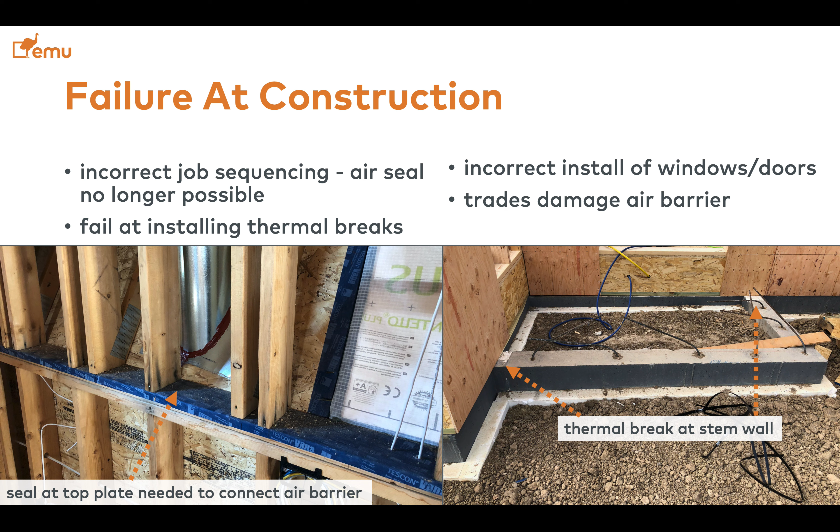So there are two accreditations. PHIUS has certified builders. PHI calls it certified Passive House trade person, which is basically the same as builders, because it's for builders and other construction professionals — not really for trades, it's more a difficult translation from German. Just like the Passive House consultant isn't required to be a certified consultant or designer — it just makes it a lot easier because at least you understand what you're doing. For the builder, along the same line, you're not required to be a certified builder to build a passive house, but if you do get the training, it's going to be a lot easier.

It's easier for the builder because it's very helpful in understanding pricing and job scheduling. It's critical for the site supervisor for quality assurance, and it can be very important for framers too, to understand sequencing and what's going on inside the framing. So we recommend builder training for these three figures, plus anyone really — there's no such thing as too much knowledge on the job site. That is never a problem.

Verification process — we talked about the design documentation. Now there's construction documentation. Typically the consultant or builder takes photos, lots of them, to look at time-sensitive passive house related job sequences. We don't care about the countertop, the floor tiles, or the paint. We care about thermal breaks, air barriers, ERVs — we care about passive house stuff. We have our own geekiness.

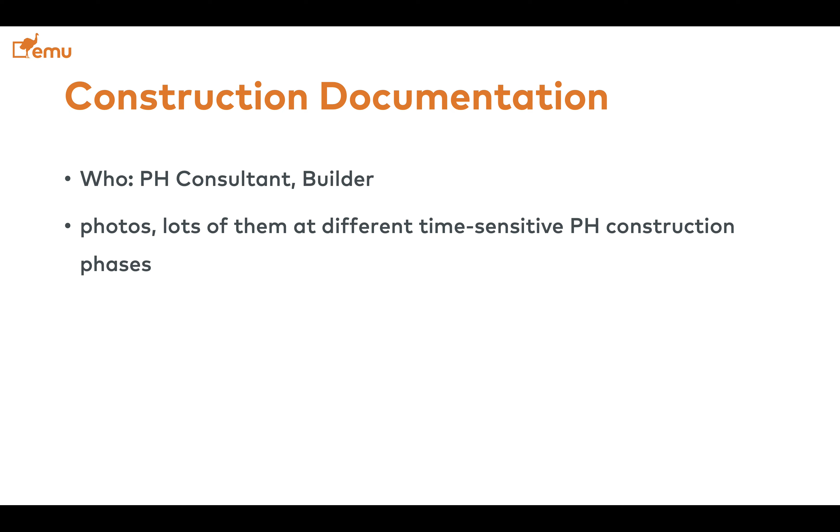The consultant, helped by the builder, needs to collect all the data sheets of all the passive house related materials, including insulation, air barrier, windows and doors, HRV, and so on. Because as the certifier, I need to know what insulation went in that wall, what its R value is, what its perm rating is. So I need more than just a photo of that insulation — that insulation needs to have a name and a last name, that is, a manufacturer name and product name with all the specs in the data sheet. I need to have an ID for that product.

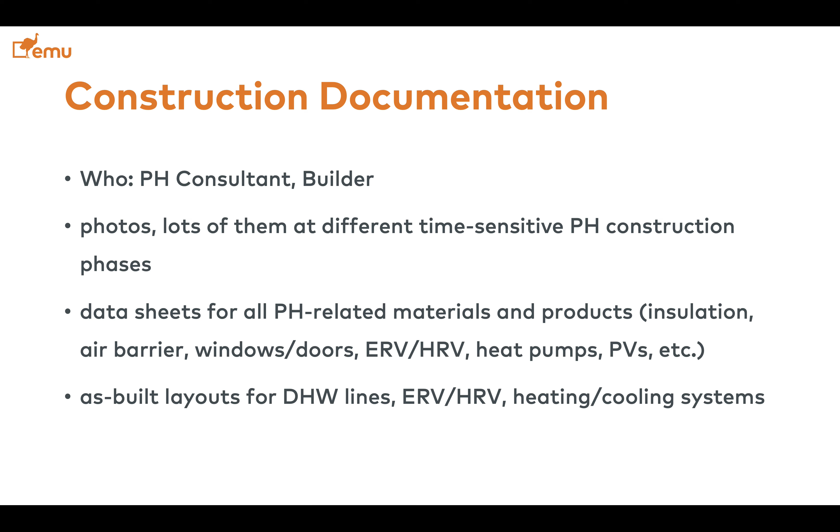We also need as-built layout drawing plans for the domestic hot water lines, ERVs, heating and cooling system, because this is all part of matching the energy model with what was built.

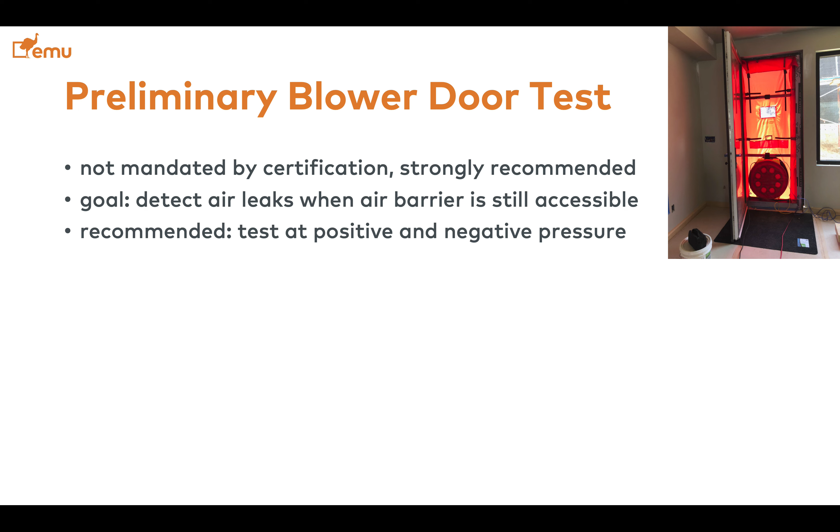Regarding testing, the blower door test measures air leakage in the building. Passive House requires the final test, and for certification you submit data only from that final one. But we strongly recommend doing a preliminary blower door test before drywall, or basically while the air barrier is still accessible, so you can detect leaks and fix them.

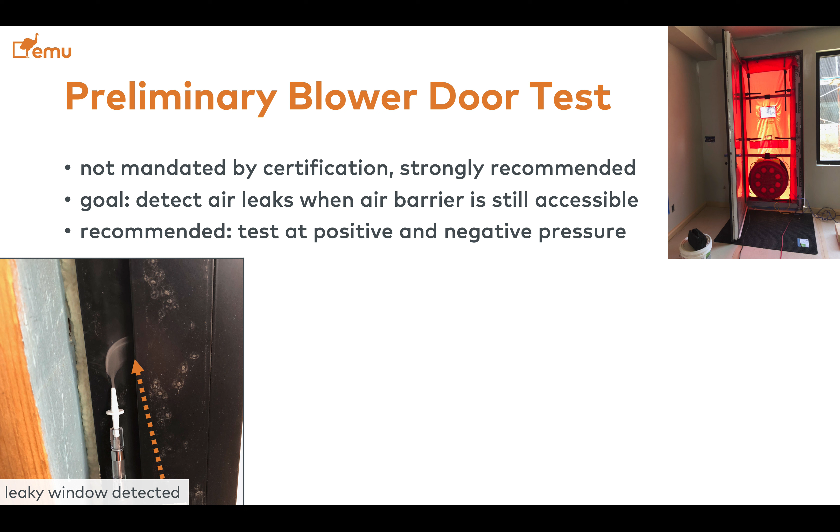For example, this photo shows a smoke pen, with smoke moving between the sash and frame of a window, revealing a defective window. At the preliminary test, you can use masking tape on ducts or other unfinished elements, unlike the final test, where no masking is allowed.

In this other window, we found a defective gasket that needed to be replaced, and we added masking on it to see how much that impacted the overall performance value.

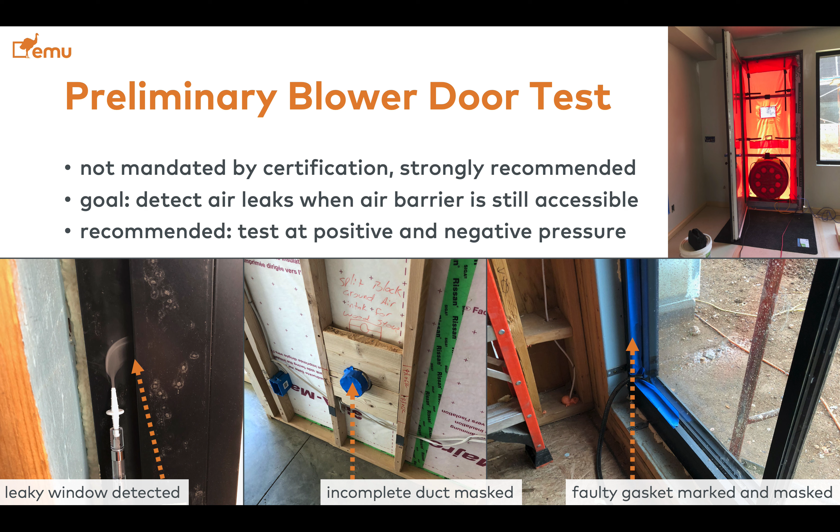Again, the preliminary blower door test is not mandated by Passive House, but it is strongly recommended, because while the air barrier is still accessible you can fix issues. Whereas once finishes go on, you can no longer fix it, and you may fail the blower door test or fail Passive House certification.

The final blower door test is different from what a regular contractor does for a blower door test. The good news is that it's a different standard, ISO 9972, not the ASTM standard, but the regular technician can do the ISO standard test with the same exact software and equipment.

It is required to test both positive and negative pressure, because some components of the envelope perform better under positive pressure, and others perform better at negative pressure. We also need multiple, different pressure points.

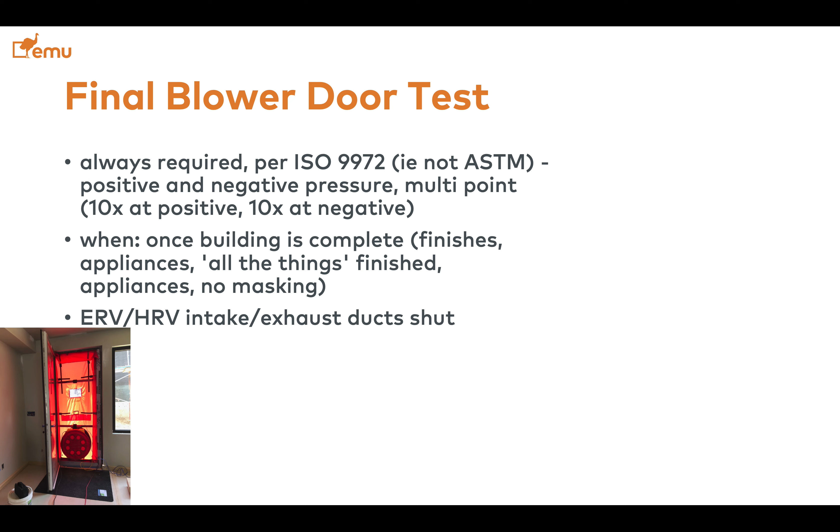ACH 50 is air changes per hour at an average of 50 Pascal, but we want 10 incremental steps of pressure around that average. The test goes from 25 Pascal, take a measurement, then 30, 35, and so on for positive pressure, then negative 25, negative 30, and so on, and the final ACH 50 is the average of all those numbers.

The final blower door test is done once the building is complete: all appliances are in, everything is in place, and there is no masking. The only thing shut during the final blower door test is the intake and exhaust of the ERV. Everything else has to be set per final use.

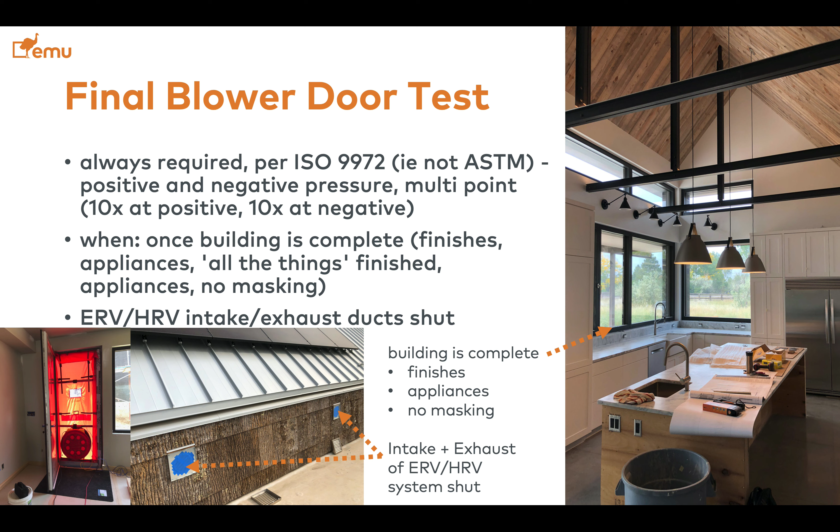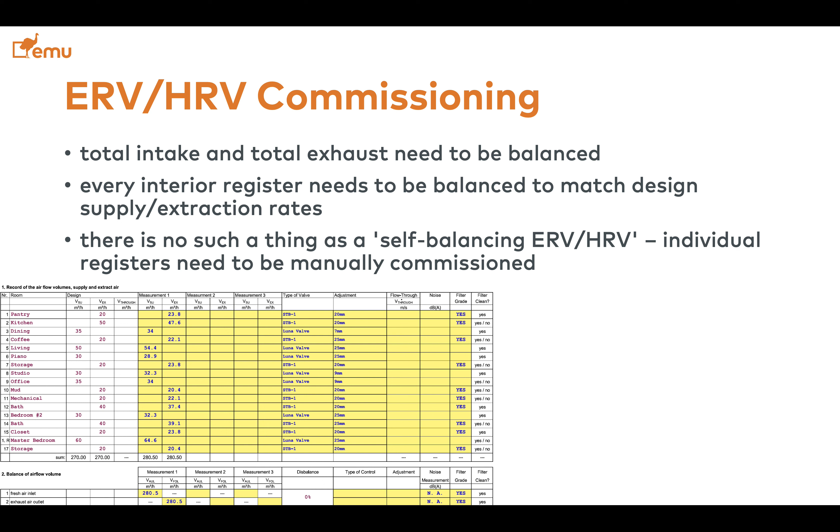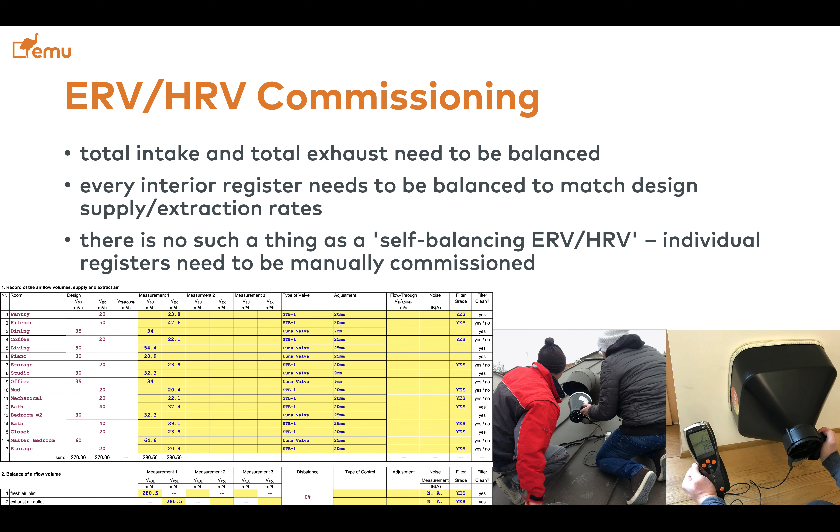For commissioning, a consultant determines the design airflow rates for the individual interior registers, for supply and extraction of the fresh air system. Then someone needs to verify the system actually delivers that in the field. There is no ERV or HRV that balances itself at the individual registers, so the interior registers need to be manually adjusted to match the required extraction or supply airflow. This needs to be done manually as part of commissioning.

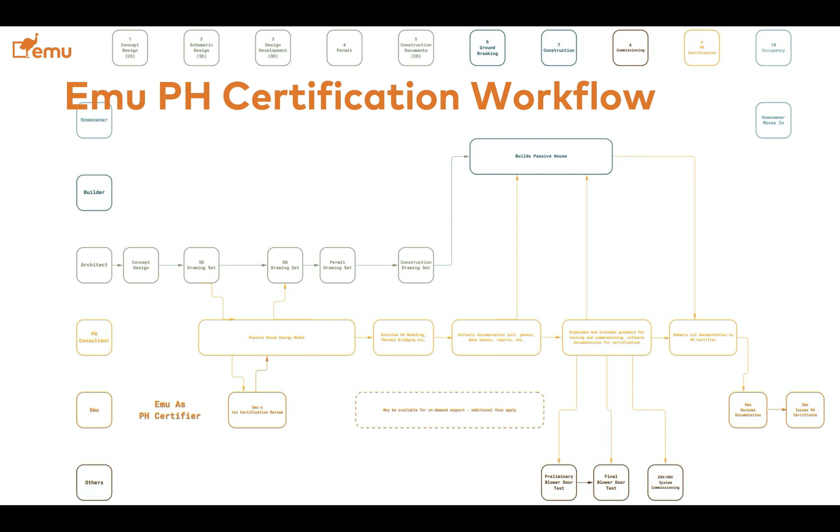We are available for support during this process, but that will impact our fees, since it impacts our time. That being said, thank you for your attention and for listening. You can send us an email if you have any questions about the Passive House process, certification, modeling, and so forth. Thank you.